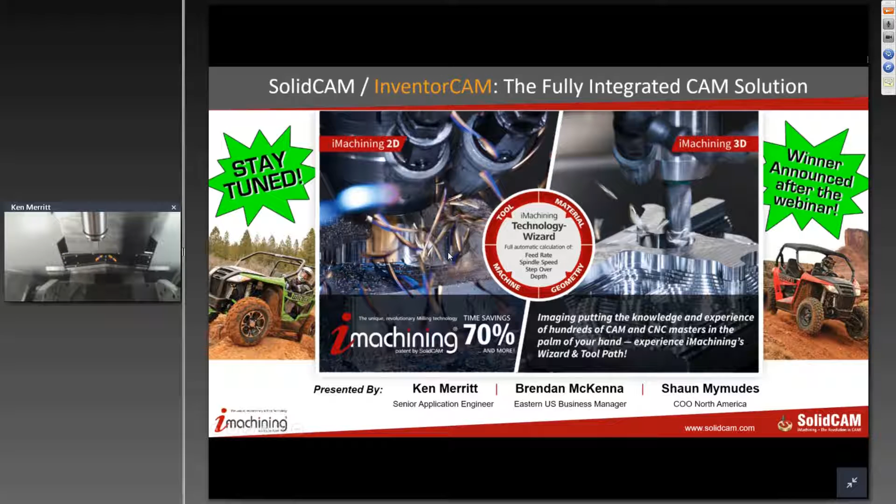We're basically going to go through today, we're going to talk about SolidCAM's philosophy, and that's leveraging what you already have to make more money, and that's the whole idea behind what SolidCAM does. We're going to go through a real brief history, and then we're going to get to the real nuts and bolts of this thing and the exciting part, where we're going to be actually doing some live cutting with iMachining.

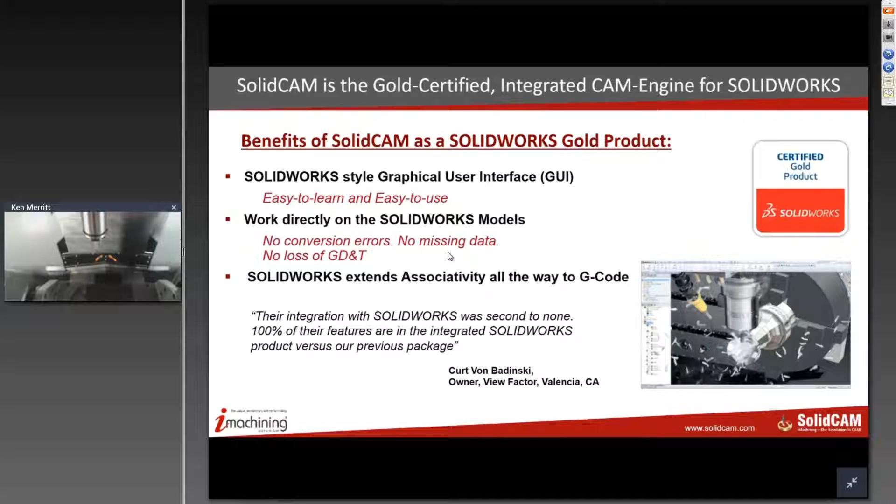So the idea here is not just with the software, but we have a technology called iMachining, which we're going to go into in real depth, and it's going to save you time on your cutting tools setting them up. It's going to save you ridiculous amounts of money on those cutting tools because you're not going to go through them nearly as often. We have customers all the time talking about that, and it really does save them a tremendous amount of money, and it's a very quick return on their investment.

And then the idea here is get more out of your existing machines. So the machines you have, you're going to have the cycle times reduced. There's going to be CNC settings that you won't have to worry about overworking your machine, because we have settings and a wizard that helps you with that. So there's an immense savings in the setup time, immense savings in the programming time, because we have a very simplified way of programming. There's a great quote from one of our customers that says he hopes not many people know about iMachining because it helps them so much.

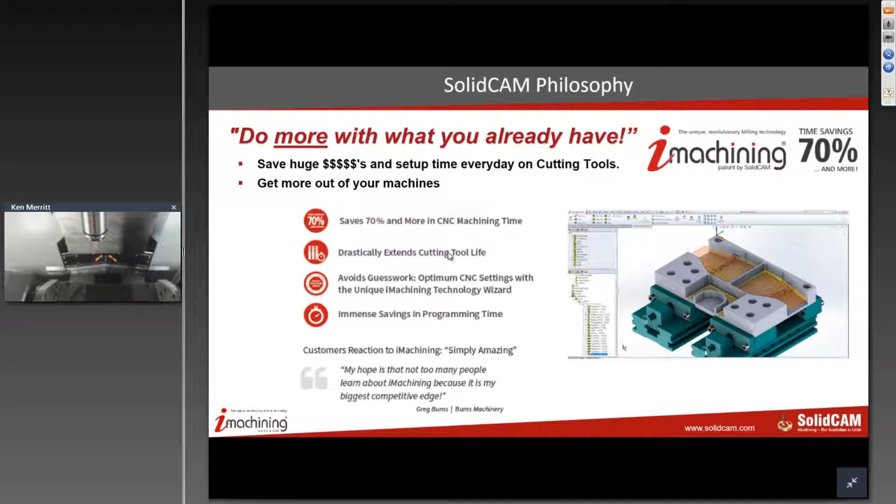Okay, so again, use your existing CNCs and the machines that you plan to purchase in the future.

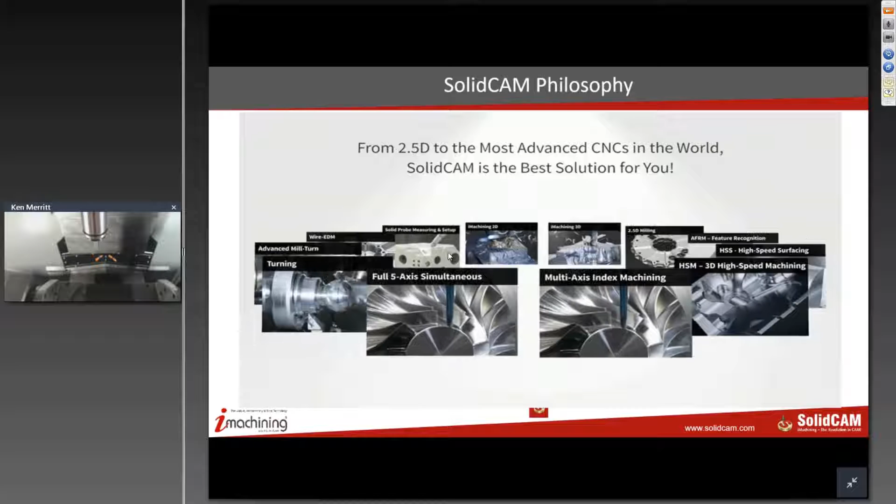One of the big things that people come to us all the time and say is, hey, I just bought a new multi-axis mill, and my current software won't program it. I can't get a post for it, etc. What do I do? So they already have a CAM system that they like, but they can't use it because they don't have a software that can handle it. Whether it's turning, mill turn, some of these real advanced machines out there, we cover that all, whether it's wire EDM, multi-axis, 5-axis, you name it. You're not going to be able to outgrow SolidCAM.

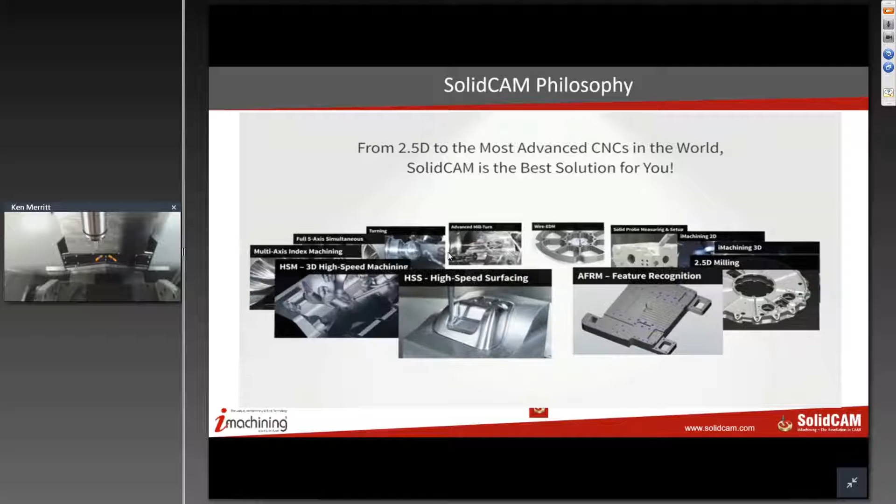Now, here's another thing. One of my customers, 034 Motorsports, was talking about how they loved to cut aluminum on their machine. That's all we ever thought we were going to be able to cut, they said. But then they wanted to do stainless because their customers wanted it. So they took their existing machine that they thought was only going to cut aluminum and started to cut stainless. It completely changed the way they do business.

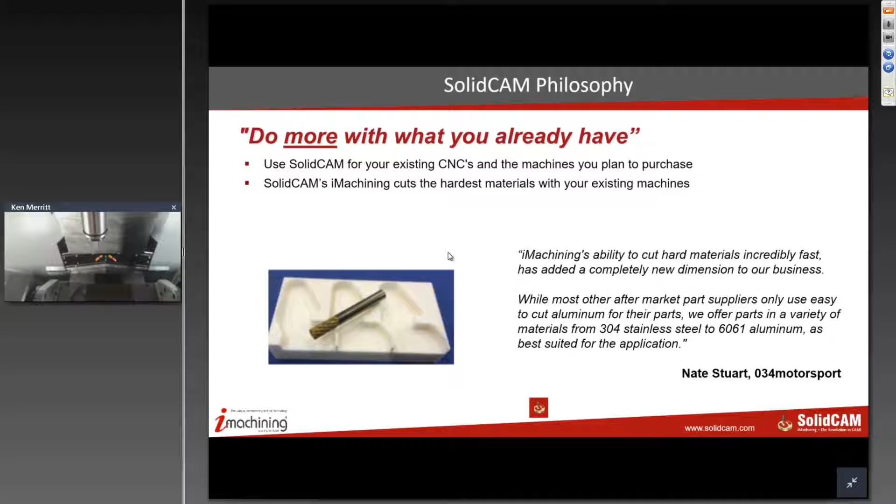Now, we also have been getting into things like ceramics. In fact, we have some ceramic companies we're working with now where they won't even talk about what's going on with the advancements we've made in that type of cutting. You'll see why later, but we have a tremendous advantage in cutting not just the hard metals, but also some of the more brittle, really hard stuff like ceramics.

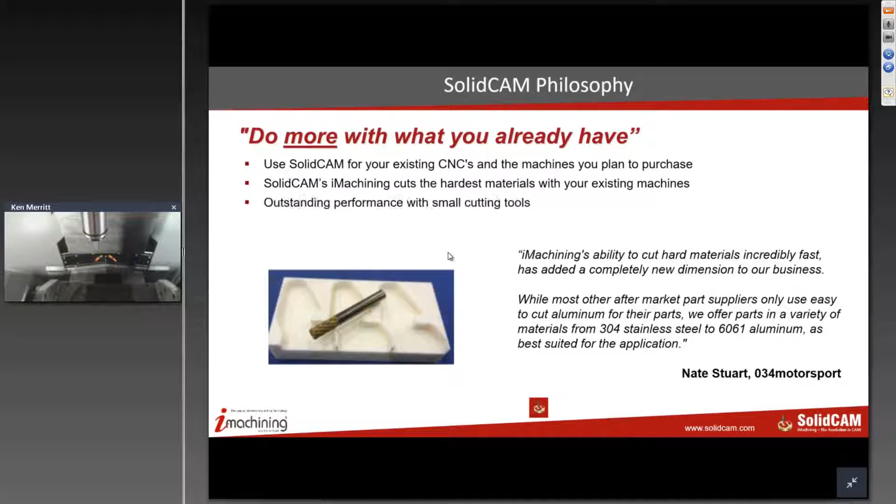So if you're in medical and you're wanting to use small tools, we can go ahead and use the smallest tools. I've got customers using tools that are almost too small to see, and because we protect the tool and how it's cutting, they can use them easily.

Ken's going to show you a little bit about the programming productivity, you're going to spend a lot less time programming with SolidCAM. So again, those are all the things that let you do more with what you already have: saving programming time, using tools you never thought you could use on materials you never thought you'd be able to cut, all on your existing CNC machine.

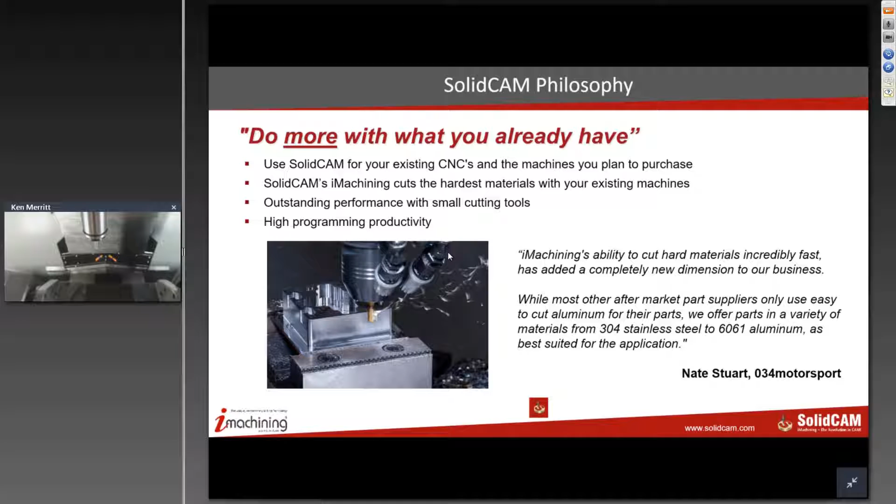Okay, so I'm going to have Brendan take it over and tell them a little bit about SolidCAM, if you would. Yeah, absolutely, Sean. The nice thing about SolidCAM is that we are still a privately held company.

That is the intention moving forward. I know as long as I'm here, I'm going to do everything I can to ensure that. So that's fantastic. Why does that make us unique? Well, one of the things it really allows us to do is to be very nimble and very forward-thinking without having to go through the red tape of working for some huge conglomerate of companies. We don't have those roadblocks.

We can channel as many resources as possible into the software, whereas a lot of other CAM companies out there now are owned by multinational corporations. So we're very forward-thinking, very quick on our feet, very customer-centric when it comes to making changes to our system and allowing for industry trends.

I like to say that we do what's best for the customers. We don't have to do what's best for the shareholders. And trust me when I tell you, there's a big difference in that philosophy.

Definitely, that's a great point. Absolutely. So again, just to continue on here with our company history, SolidCAM was founded in 1984, and it started as a standalone product, but then back in 2003, we became a fully integrated product into SolidWorks.

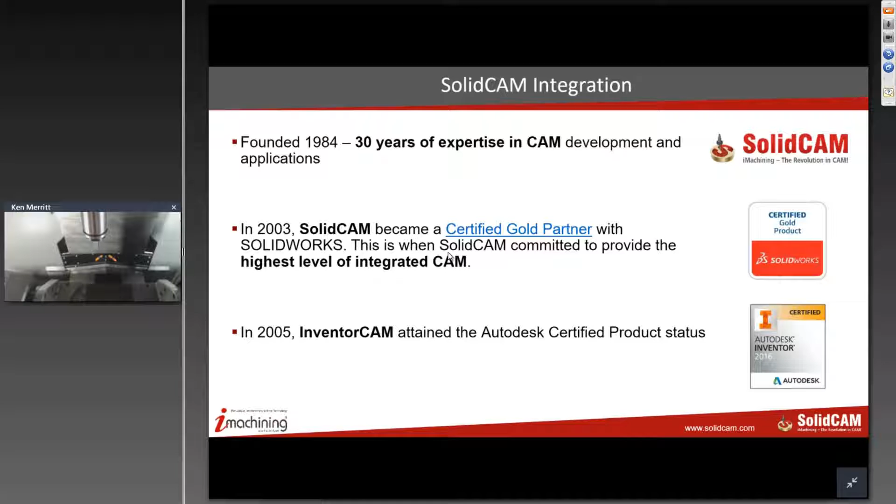In 2008, SolidCAM had a major expansion. We expanded into North America, and we've got direct support and post-processor staff located strategically throughout the country. The nice part is our staff is in basically every single time zone - people on the East Coast can take advantage of West Coast support late at night, and you can go in the opposite direction too because we have European support as well.

So we do have a direct sales team. We don't have a reseller channel, and there's a reason for that - it's actually very convenient for the customer for us to be able to provide support directly from SolidCAM. We don't have to worry about third-party resellers, and it really allows us to maintain strict control over the software and how it's being distributed.

We also offer free training webinars, we do that bi-weekly, and we have some of the best support in the business. Most of the people on our staff are either programmers or machinists or a combination of both. It's not just a guy sitting behind a desk going through a Rolodex trying to figure out the answer to your question - these are seasoned professionals. I myself am very proud to be part of this organization because our service and support is absolutely hands down the best. There's no question about it.

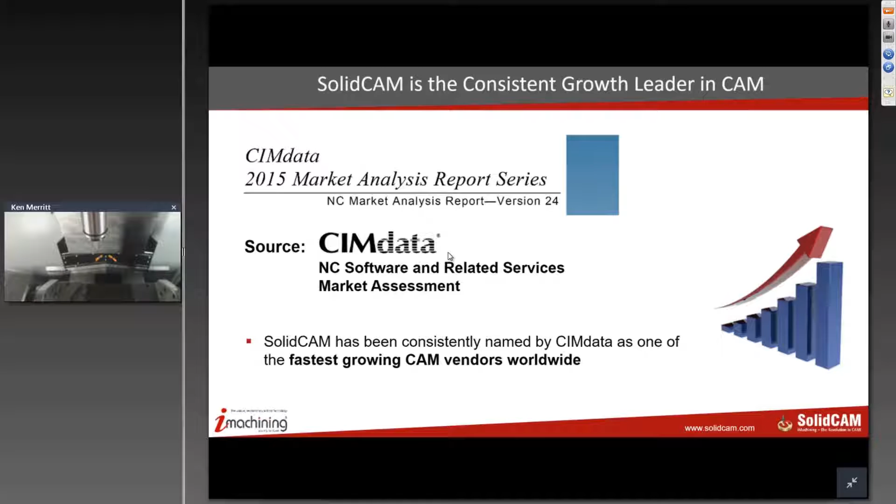Year over year, we did 40% growth over the previous year, 30% the year before that - every year it's in the 20, 30, 40% growth range. This year we're on an extremely fast-paced track, and we don't see that letting up. We got kind of a late start, so you may not have heard of SolidCAM as often as say a MasterCAM, but you'll be hearing about us shortly because our growth is just phenomenal. Well, and that's a really great point, too.

Companies like MasterCAM spend a lot of time and money on marketing budgets, whereas they probably should be concentrating more on the software. We think that aspect is pretty important. So we may not have the biggest marketing budget in the world, but we certainly have the best reputation.

For instance, when you see us at IMTS in Chicago, you won't see us in the CAM pavilion. You'll see us in the pavilion next door, because we won't go anywhere where we can't show how SolidCAM makes an impact on machine time. Pretty pictures on a screen don't cut it with us - it has to be on a machine. So if you ever see us at a show, you'll see us running on a machine, because that's what's most important.

Now I did want to explain a little bit - stay tuned, because I did not want you guys to drift off to death by PowerPoint. We know how that's going to work. We are going to be doing the live cutting now, and I also wanted to explain that we just had a recent development with the contest.

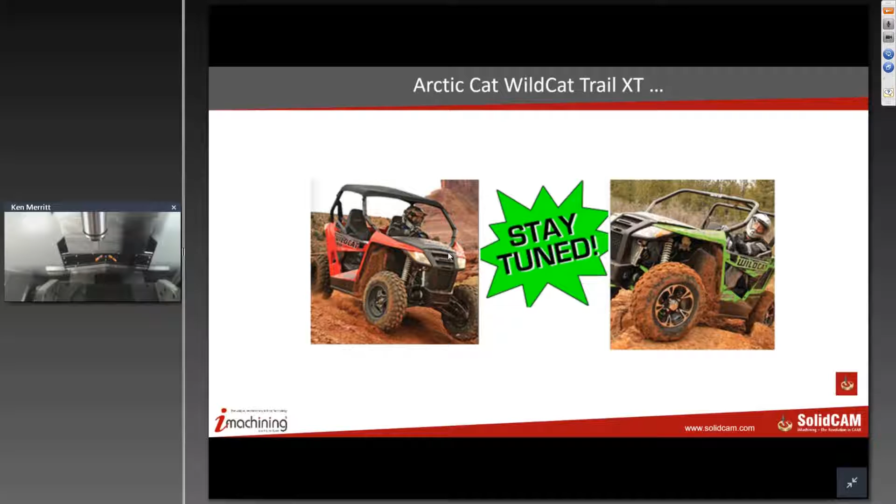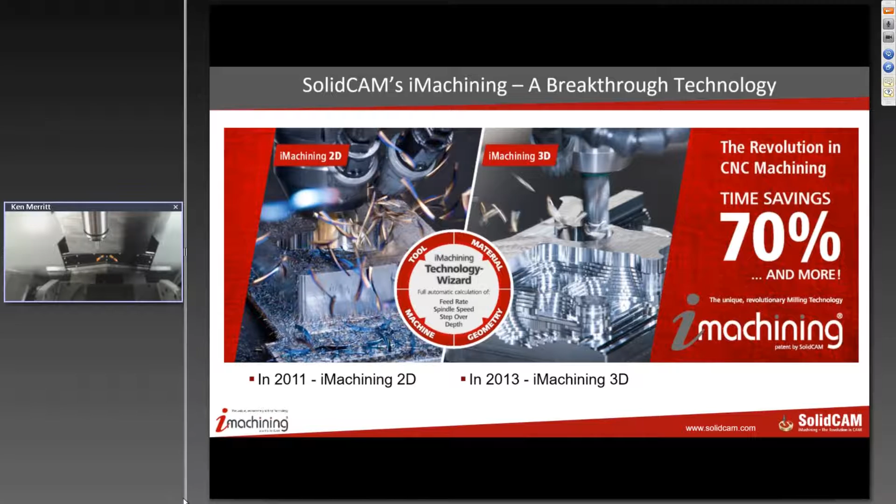All right guys, my name's Ken Merritt, and I'm hoping everybody can hear me just fine. I want to take you through what our technology is and how it works. There are two components of iMachining that really drive its fantastic relationship with our customers. One is the iMachining toolpath, second to none - it's absolutely fantastic, and we're going to spend some time going through the science today of why and how it works. The other item is the iMachining Wizard, and this makes the programming of iMachining very effective.

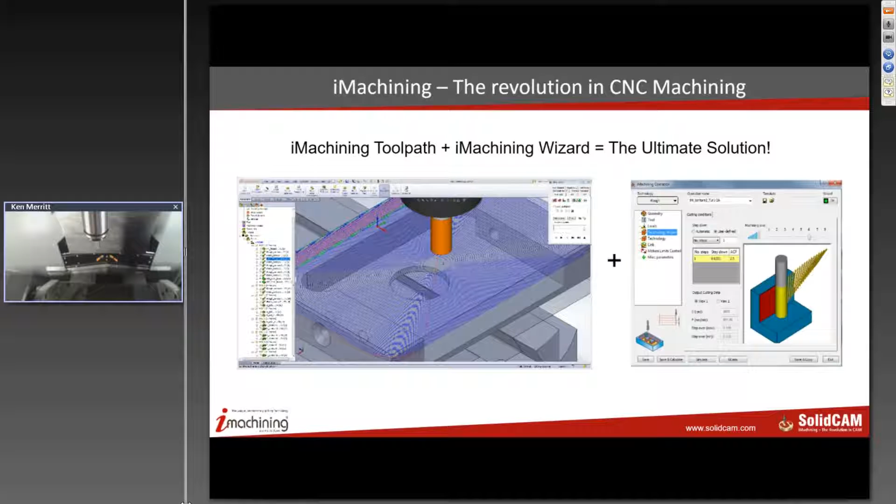Because in a real-world scenario, in order to program the appropriate feeds and speeds, you would have to take into account a whole slew of data about the material itself. You'd also have to know a bunch about your tool and what it's capable of doing. You'd have to evaluate the geometry and figure out how deep you're going to run your tool. And you would have to know not only the kinematics of your machine, but also be aware of vibrational characteristics, fixturing, and things of that nature. So as you can see, this could be a very complex set of parameters you'd have to figure out in order to effectively drive the iMachining toolpath at its optimum level.

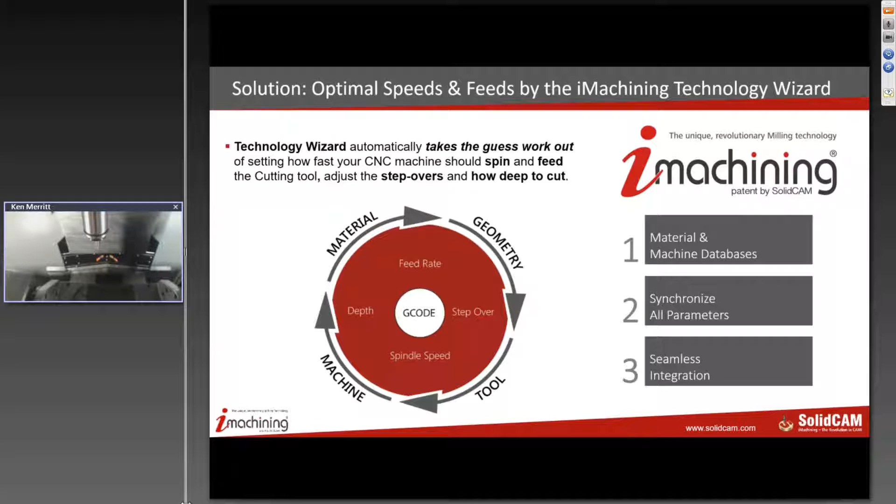Now with the iMachining Technology Wizard, it takes all that guesswork out. It takes the information from the machine - it knows the kinematics, the maximum feed rates and spindle speeds and things of that nature. It takes the material hardness and machinability characteristics. It takes the tooling information, and blends all of those into a symphony of parameters that are very coordinated to drive the tool the way you're going to see it run here in just a few moments. One of the things we like to talk about is

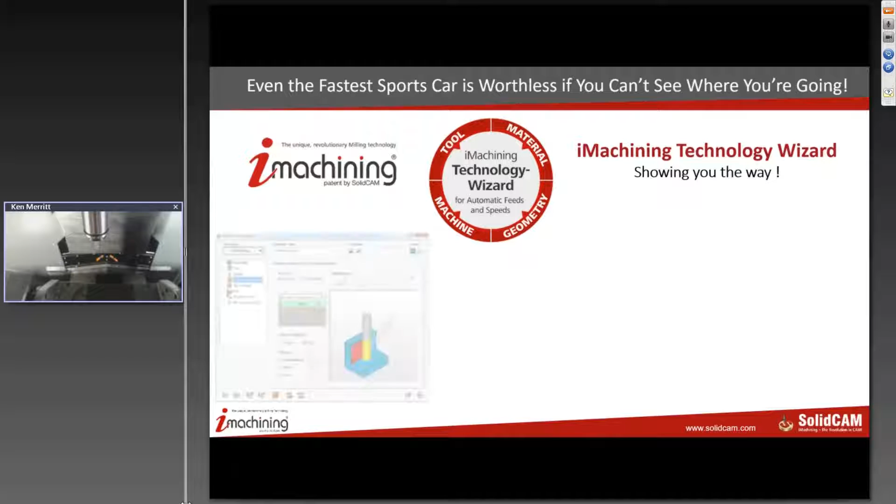finding your way through all of this stuff. If you had the fastest sports car in the world, but no lights, you're not going to drive it at night, right? If you can't see where you're taking it, it doesn't matter how fast it is - it's not going to get you there. So one of the things we want to take you through is this iMachining Wizard that we talk about.

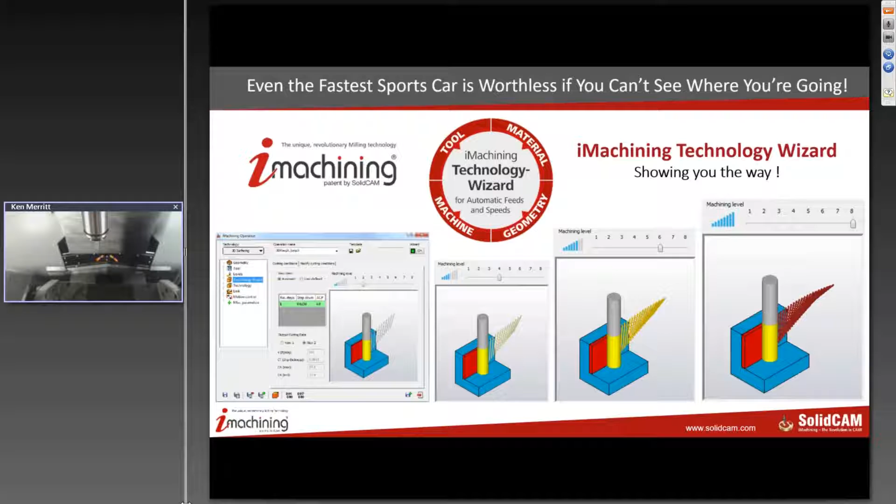As you can see here, the idea is because we have pre-knowledge of the machine variables, the material variables, and the tool characteristics, we can set this slider from a very conservative tool path to a very aggressive tool path, and the system automatically balances those parameters for us so we can quickly take advantage of that knowledge instead of fumbling around trying to find our way through that. So we're going to get into the cut right now.

What we're going to do—the safety glass goggle you see here, over on the left upper corner is a little mold core we developed for this. There's a couple of things I want you to pay attention to as we're cutting, and I'll point those out as we go through this.

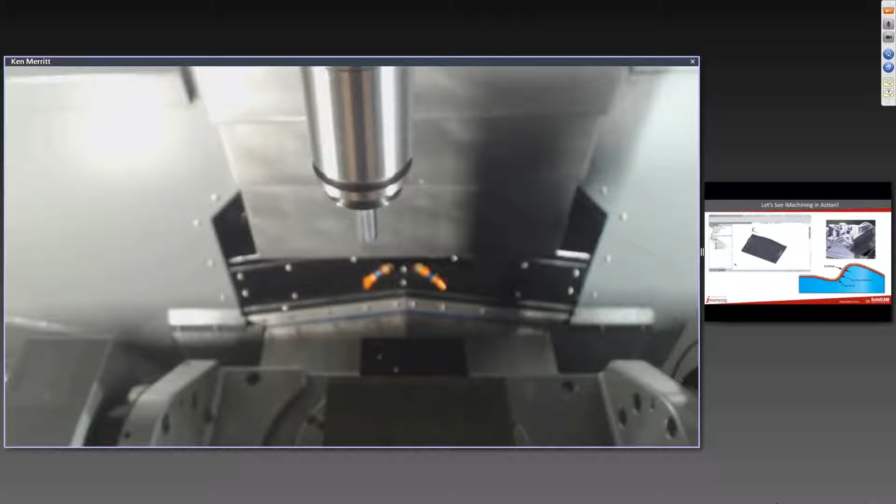Okay, now we are in 1018 cold roll steel. That's a 6x4 block you should be seeing in there. It's a little below the screen view, but that is also a GW Schultz HGW 3/8 inch tool you're seeing in there, and I believe we are ready to go. We're going to rock and roll. Here we go with the cut.

Now we're going to be cutting very fast here, as you can see. We are at 750 thousandths total depth of cut, and we're building a 3D mold core here. What you're going to see take place as this tool is cutting is very controlled cutting angle management. You can also see clearly in the picture that the chip ejection is extremely dynamic, and that's because we're always staying on the chip thinning side of the cut. I'll take you through some of that physics in a few minutes and show you how we do that. But we are currently cutting at 13,750 RPM on a 3/8 inch tool, at anywhere between 180 and 250 inches a minute, and we're doing that at a cutting angle of 45 degrees, okay?

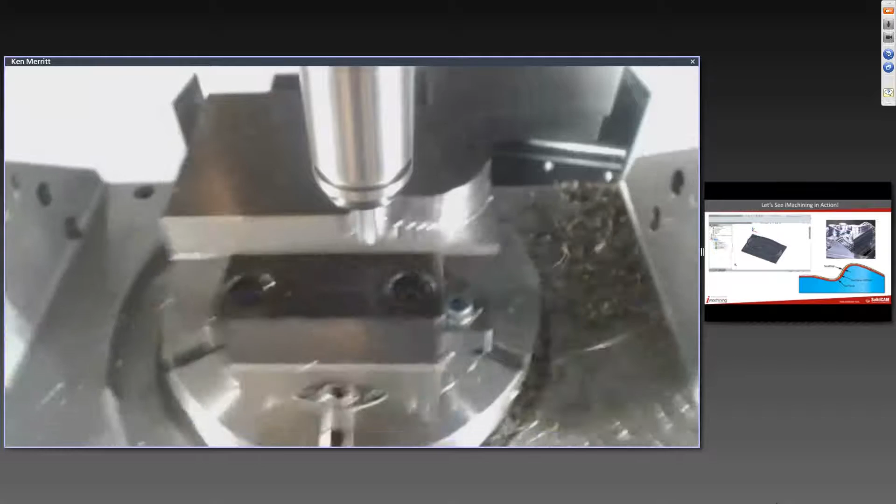Now the other thing you're going to notice here is that the repositioning moves are very optimized. What we do is during the calculation time of the algorithm, for each movement of the tool, we're automatically updating the remaining stock so that for each reposition move, we know where the material has been cut out, and we're able to move around that with what we call detour moves, without forcing the system to go back up to the rapid clearance plane. This gives us a way of very effectively repositioning the tool in a very optimized manner.

The other thing you'll notice as we go further into this cut is we've done an extensive job of regionalizing the cut. Now we're going to go into the cavity portion—we cut the hole right into the model, and we're going to helix right down to 750 thousandths depth of cut. We're already at 600 thousandths right now, and we're going to take off cutting this with what we call a spiral morph. Now, the idea behind a spiral morph is that it keeps that tool in contact and allows us to get a much better advantage in the cut without having to reposition. But a spiral morph can only go so far within the range of the minimum and maximum cut.

You'll notice it switched into our D-slot recoil, and now it's going back into that spiral morph. See how effective that spiral morph is? When that's done correctly, you can move a lot of material really quickly, okay? Now it'll go through this again—it'll do the spiral morph as far as it can, and then when it needs to, it'll switch back into what we call our D-slot recoil, which is what you're seeing right here. This allows us to very effectively reposition that tool, get right back into that next cut, but without ever over-engaging the tool, okay?

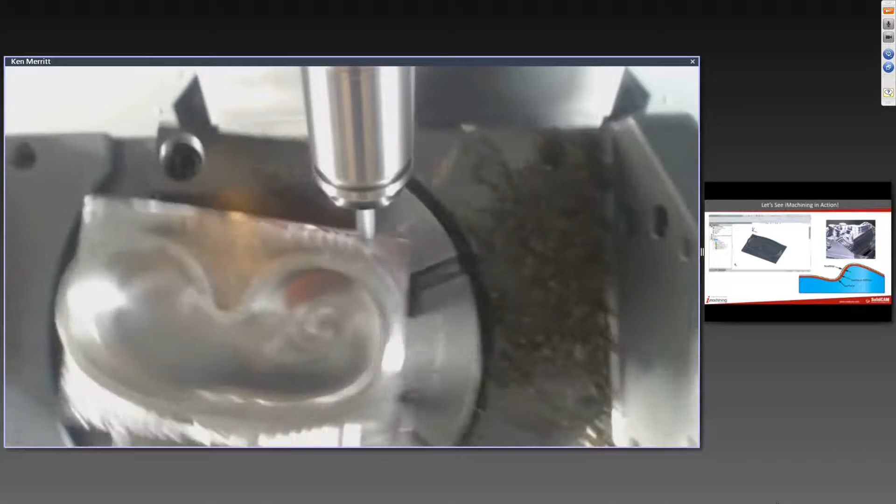A lot of people don't think about how a 5-axis machine can be used. We're not cutting a blade here, we're not cutting an impeller. However, we can still take great advantage of a 5-axis machine because now we can tilt this over on the side of the ball, and we can use a much higher surface velocity area of the tool to do our finishing. As you're going to see as this goes along, this is going to result in a very nice surface finish for us while we're moving very fast across here.

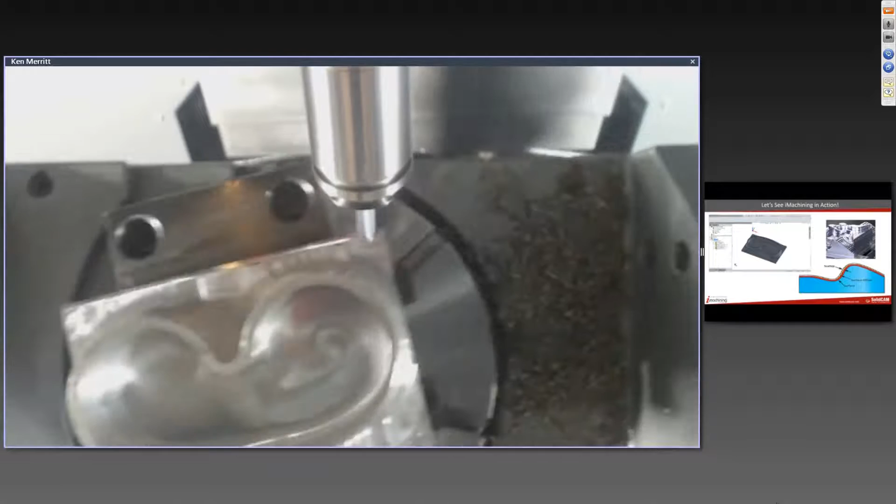I'm at 16,000 RPM and about 180 inches a minute doing finishing.

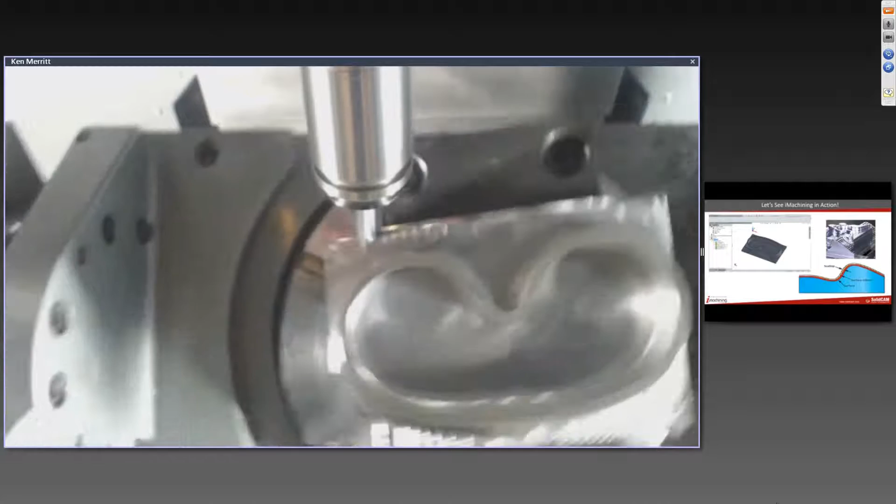And you can already start to see that shine appearing back there. We're getting a very nice surface finish on this because we're tilted over at 40 degrees, and we're doing a lead angle of 10 degrees so that we never put the tip of the ball where it has no surface velocity onto that cut. So something to think about.

We not only do a fantastic job in straight 3-axis, but there's also some really powerful things you can do going into 5-axis, even if you're not dealing with engine porting or turbine blades or things of that nature. Okay, so now let me reach in here and turn this air down just slightly.

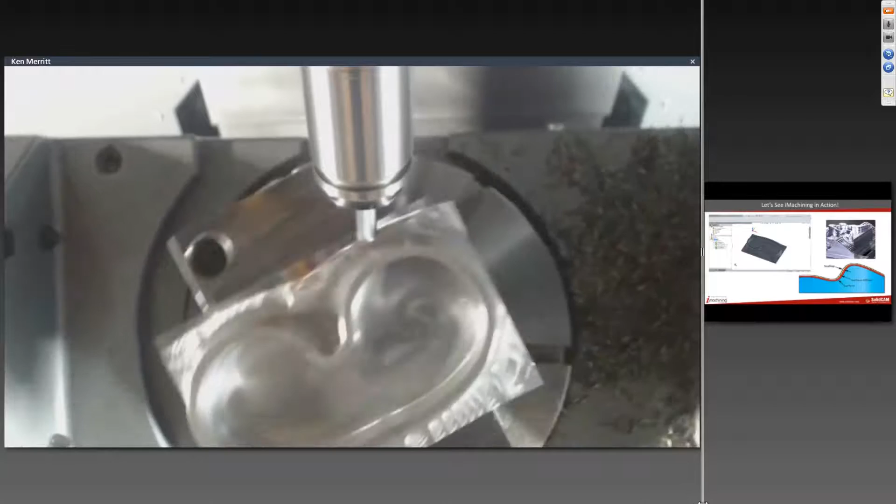Ken, I was just going to add, for something like this, of course you could cut it with a 3-axis machine, but once you take this part off and see the surface finish you're getting, it's also going to drastically reduce the amount of handwork you'd have to do to polish that surface.

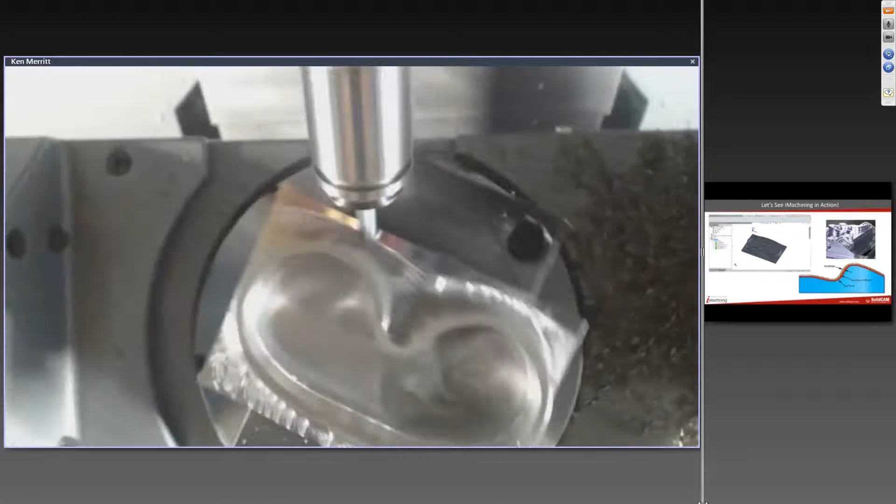Absolutely, there are so many benefits to it. It's amazing. So, trying to get people to think outside the box here: just because you're not doing complex aerospace blades or vanes doesn't mean you can't benefit from 5-axis. And SolidCAM has an absolutely fantastic simultaneous 5-axis module that will do everything you need it to do.

All right, so at this point... hold on, Ken, let me just add this. We're on a 5-axis, and it's a nice machine, and we'll talk a little bit about that later.

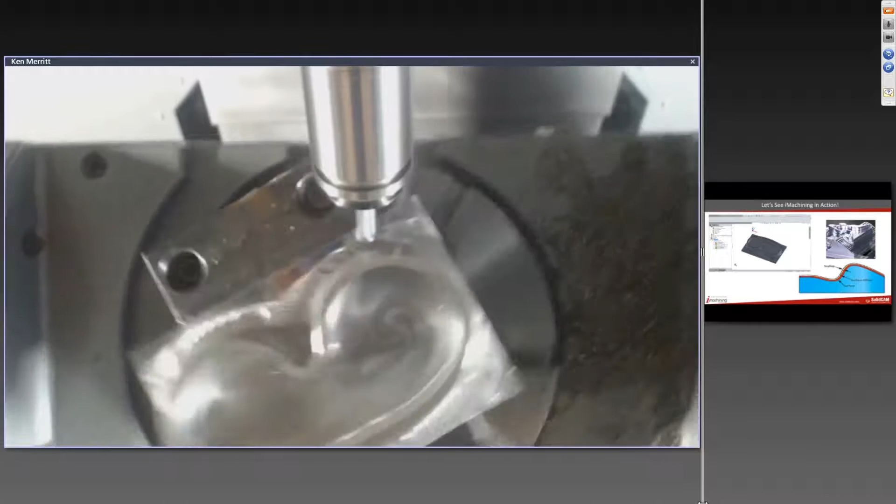But again, I'll bring up IMTS. We had an old Defiance mill that was meant for cutting wood and foam, and we were just running the snot out of it, and people were shocked and amazed. So we love to call that our Angry Beaver. We were originally supposed to do our stuff today on a sharp mill, a very low-end mill, but the setup didn't work out. Suffice to say, whatever machine you have, it's going to absolutely boost it beyond belief.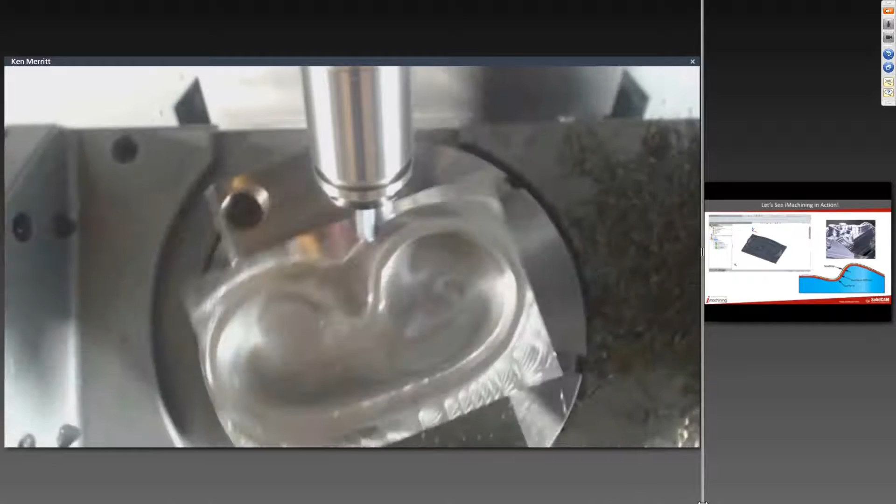Yeah, Sean, that's a great point. We're going to get into more of that philosophy as we move forward, because I'm sure a lot of people might be looking at this saying, well, do I have to have a super high-end machine to make this happen? And the answer to that is no. We're going to make you more productive with what you already have. We'll show some video of that in a little bit here.

Well, at this point, let's do this. Go ahead and change your screen again. Slide the bar over, leave this open enough that you can watch this. It's kind of cool to watch all this 5-axis stuff going on, and you'll see as it progresses the growing beauty of that surface finish. But let's go ahead and expand the PowerPoint back out.

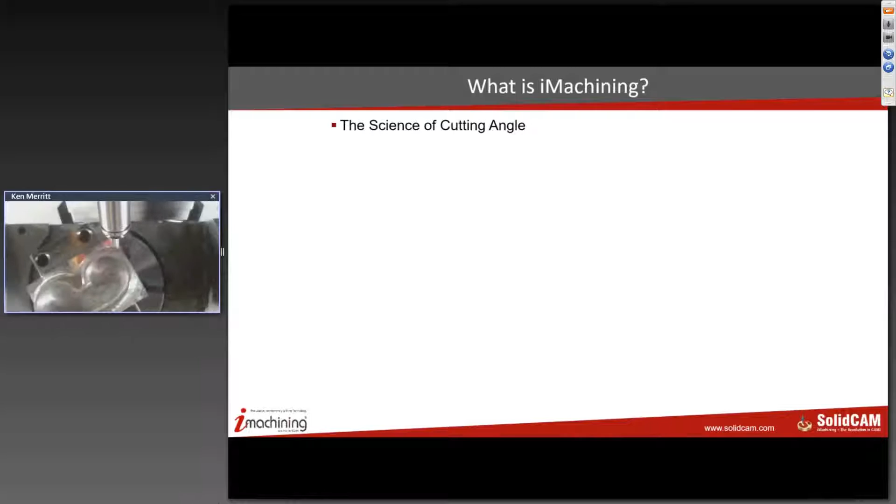I want to get into the science of cutting angle and explain a little bit of the physics behind all this, so you understand there's way more to this than the average person thinks about. What we are doing is managing how the tool is engaged to the material, in a very specific way that helps us control a lot of the forces applied to the tool and consequently to the machine.

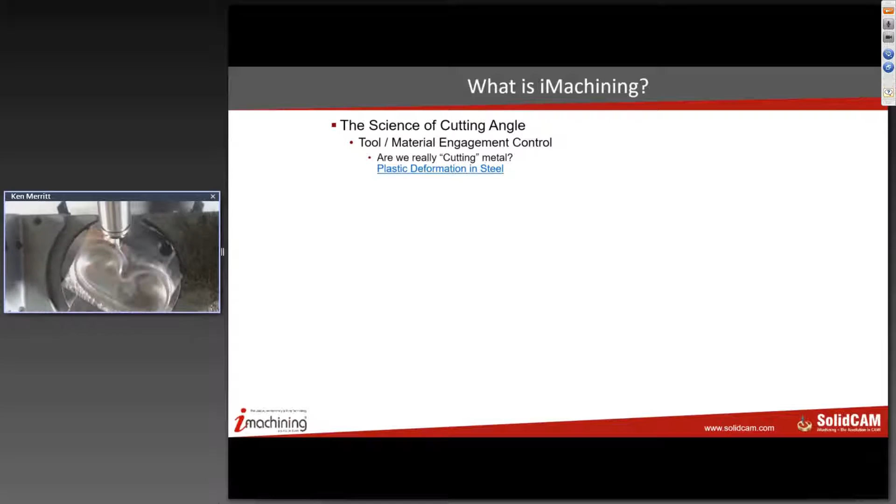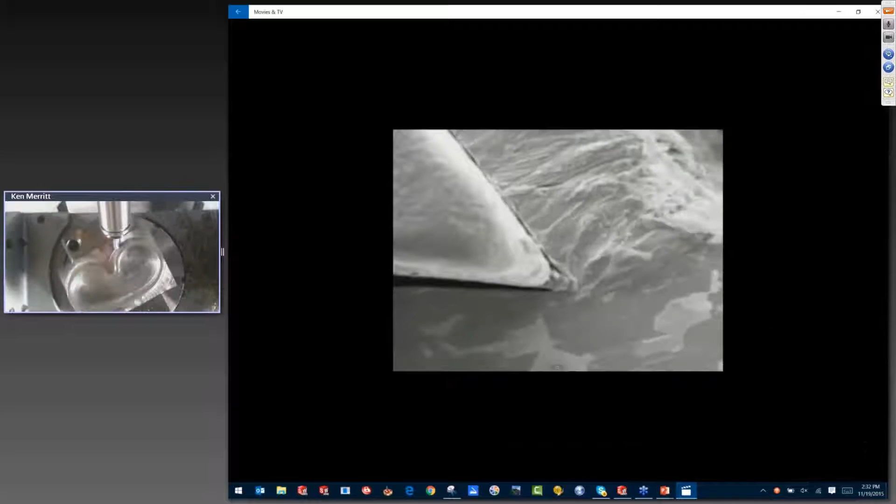Now, one of the things I want you to be aware of: we're not really cutting steel, okay? It's kind of a misnomer when we say we're going to cut that part. What we're actually doing is called plastic deformation, and this video gives a real clear image of what plastic deformation is. This is a lathe insert passing through 1018 cold roll steel, similar to what we're cutting today. Notice this is a finishing tool, a 35-degree tool, and you can see under here what I want you to watch.

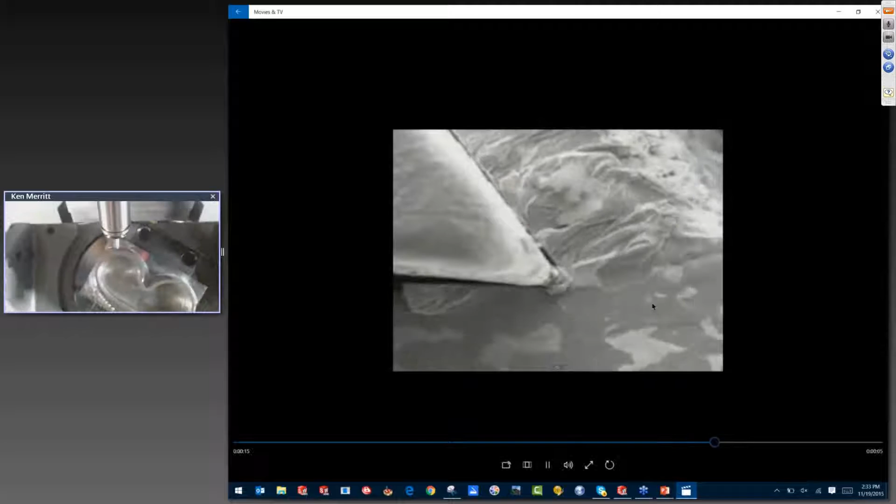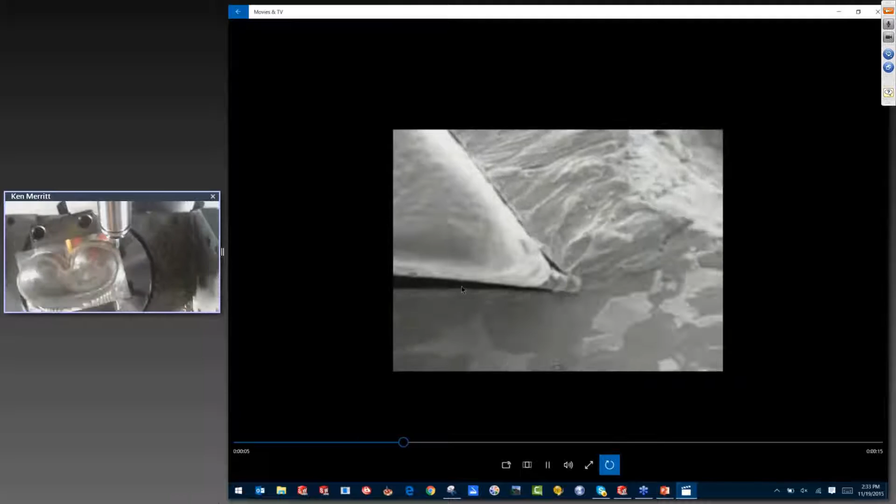Let me put this into rewind so it'll do it. You can see the material sort of bend under here due to the pressure. That's what's known as elastic deformation — the ability of a material to be deformed from its natural state, but once the pressure is removed, it returns to its natural state without deviation.

What's going on up here is obviously not elastic deformation. This is plastic deformation, okay? It's basically a chiseling action against that material. So I want you to keep that in mind as we begin to discuss the physics of what's happening during that cut.

Are we going to be testing later for that, just to make sure people are paying attention? We might. Could we make that a criteria of whether or not they win the contest? No, I don't know, probably not.

Well, let me get you into this a little bit, because I think this is pretty cool stuff. One of the things we've noticed in practical examination over the years as we've been studying this is that as we increase the cutting edge velocity, the actual latent energy of plastic deformation goes down. This makes it much easier to remove the chip, which means we can take a thicker chip. So we have the rotational velocity of the cutting edge, and we also have the forward velocity of the tool. When those two are in balance, the pressure vector on that tool is about like you see it here.

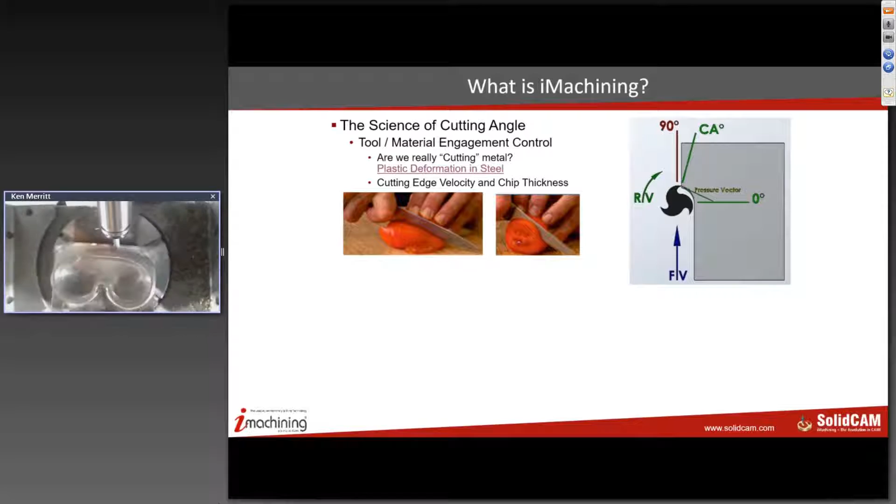Now I want you to think about a knife on a tomato. If you take a sharp knife and just push it straight down on a tomato, it'll cut it, but it's going to squish it too, right? But if you take that same sharp knife and drag it very fast across the tomato, the knife will virtually fall through the tomato without any effort whatsoever. That's physics—a little different, but the illustration is very much the same as what we're talking about today.

As you increase the cutting edge velocity on the flute, you decrease the amount of energy necessary to remove the chip. Now, what that allows you to do is increase the chip thickness, which means you can carry more heat off in the chip, which means you can increase the velocity of the cutter. It's going to generate a little bit more heat, but you can then increase the size of the chip, so it takes more of that heat with it. So it's kind of a ripple effect—it rolls up on itself. And of course, there's a limit on that.

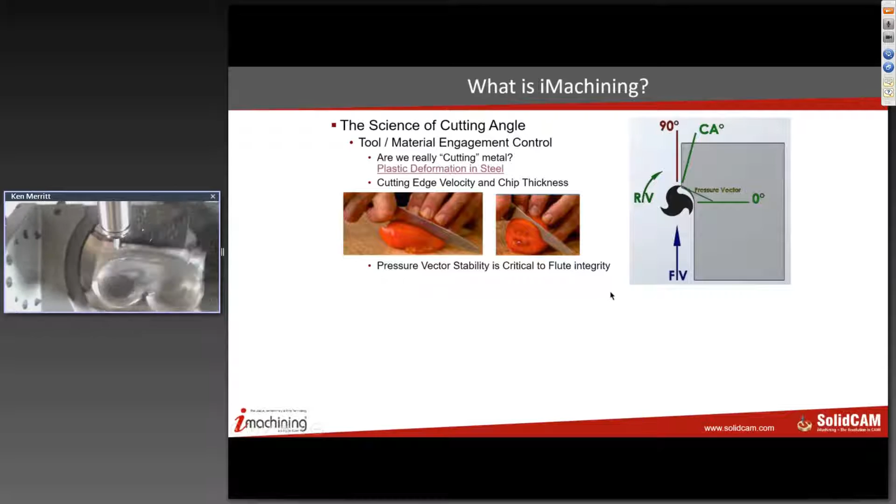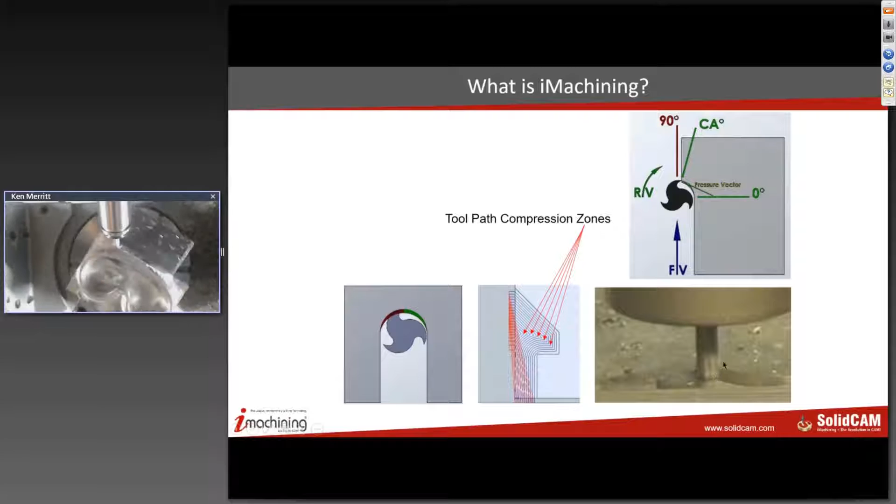But let's take a look at a traditional style of a cut. This is a traditional pocket shape. Each one of these sharp corners here, I like to call a compression zone. This is where, when the tool makes this transition, the tool becomes completely enveloped in the cut—we get into this type of mode where we're in a full slot cutting condition.

Now, on the left-hand side of that cut, this chip is getting thicker and thicker as the flute advances towards the 90-degree quadrant. On the right-hand side, the chip is getting thinner and thinner. The other thing that happens over here is, as that chip is curling off, it's actually going right into the direction the tool is traveling, and so you wind up getting what's called chip compaction. Now we have conduction that's conducting the heat in that chip back into the tool and overheating it.

That's why for years the tooling manufacturers traditionally only recommend 300, maybe 400 surface feet when cutting steel. Well guys, today we were at 1,400 surface feet in that roughing operation. Pretty dynamic, okay? And we can do that because we're getting a very dynamic ejection over here on the right side. The chip is being ejected opposite the direction of the tool, therefore carrying all the heat out with it.

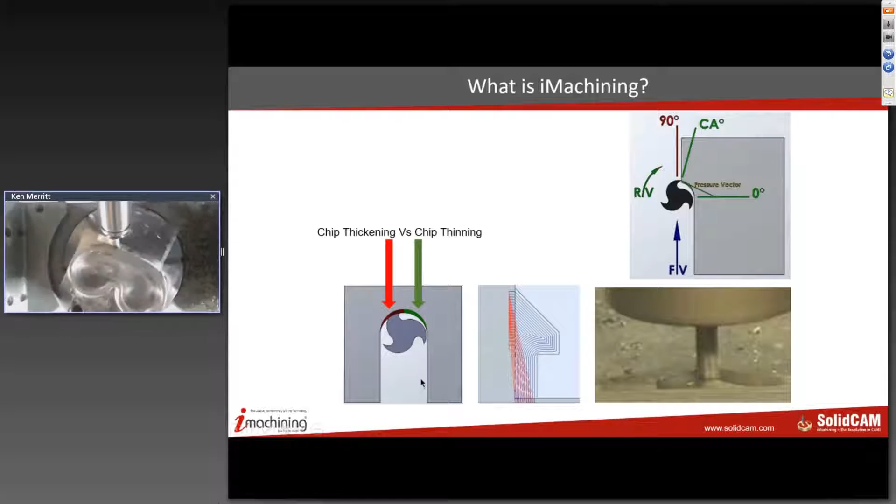Now, the other thing that happens is as the tool is cutting here, the pressure vector, when it starts out, is pushing virtually directly opposite the direction of the tool, and it creates a linear or deflective force on the tool—which is one of the reasons we've never been able to go deep, because we wind up breaking the tool off from putting so much linear force on it. Also, once we reach the thickest part of the chip here at the quadrant, the pressure vector is pushing virtually perpendicular to the direction the tool is traveling.

That creates that flex. We've always had to come back and take a flex cut because of that. So we wanted to get rid of all of that, but there's also something else that happens here that is very, very powerful.

For an instant in time, when that flute crosses the 90-degree quadrant, the effective rotational velocity of the cutter, as it relates to the forward velocity, becomes zero, but we still have forward velocity on the tool, so that pressure vector gets flipped to the outside, and now we're pushing inward on that flute and causing it to break.

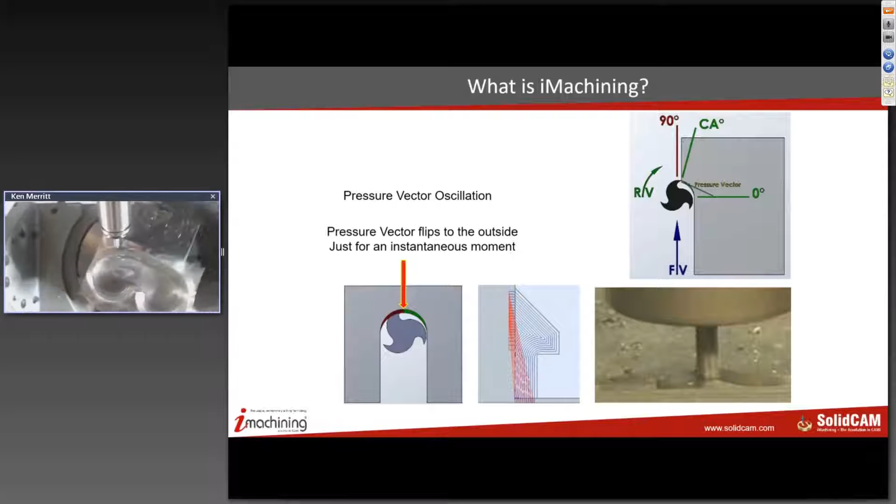It also creates what you guys have all seen, harmonic vibration. What you noticed, if you could hear it today, that tool never sounded like it was chattering because it's never seeing this flip.

That's because our algorithm limits it to 80 degrees of cutting angle and 10 degrees minimum. We've noticed over our tests that somewhere between 85 and 90 degrees, we begin to see that increase in harmonic vibration relative to approaching that quadrant, approaching that vector flip.

So we kept it below 80 so we don't run into that. The below 10, we don't ever want to see a cutting angle below 10 because then we get into a situation, that video I showed you at the beginning, where we're using the plastic deformation.

We have to have a chiseling action in order to remove that chip. If we just bounce off the surface, then all we're doing is burnishing and dulling that cutting edge, and that's not a good thing either. Not to mention that at 10 degrees it's not a very efficient cut.

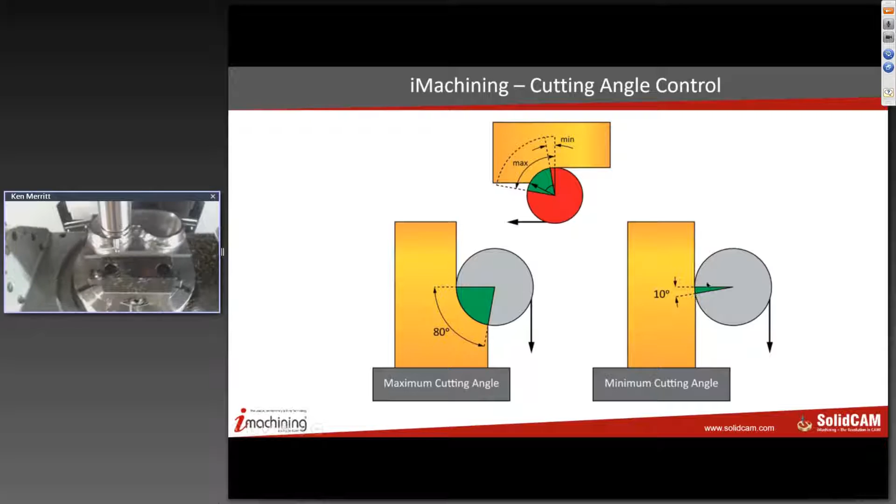So we control all that with our algorithm. That's one of the things it does very, very powerfully.

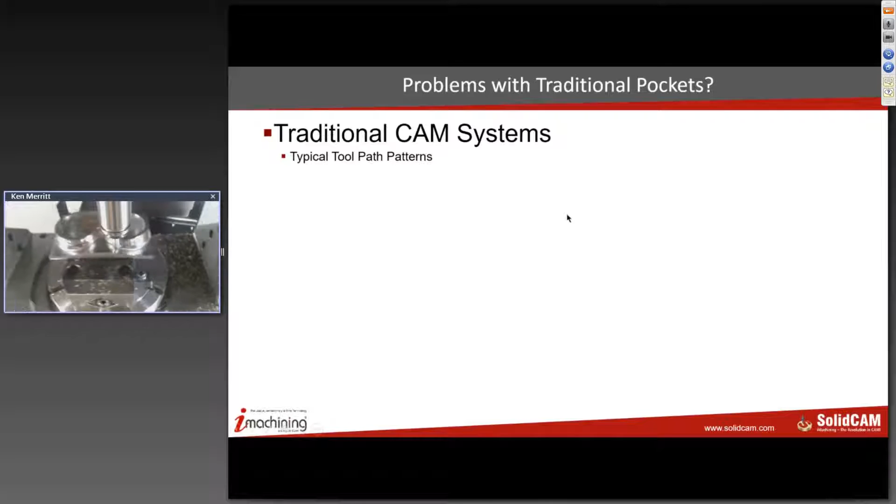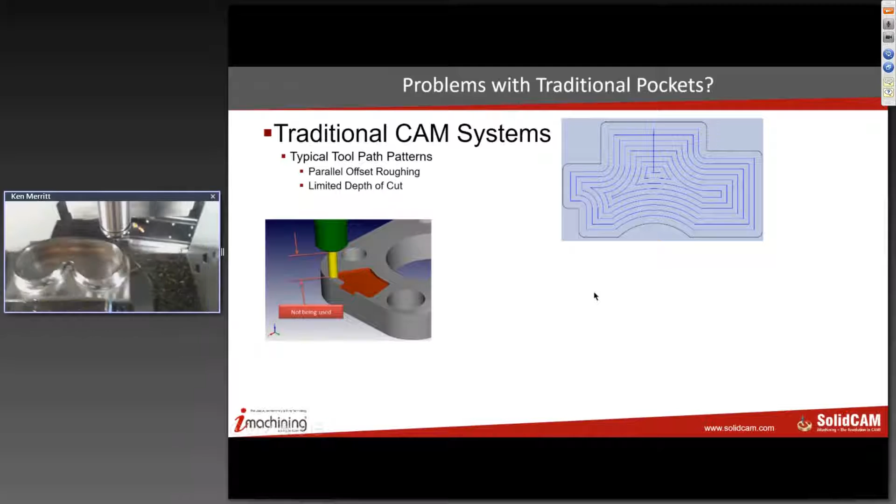Now I want to talk about a traditional toolpath and some of the problems we have with it. Because it's a parallel offset roughing path, notice all these sharp corners. Everywhere the tool changes direction, we get into those compression zones, and because of the increased linear pressures, increased forces on the tool, compaction, and increased heat, we can only go so deep, which means most of the flute of our tool we're not getting to use.

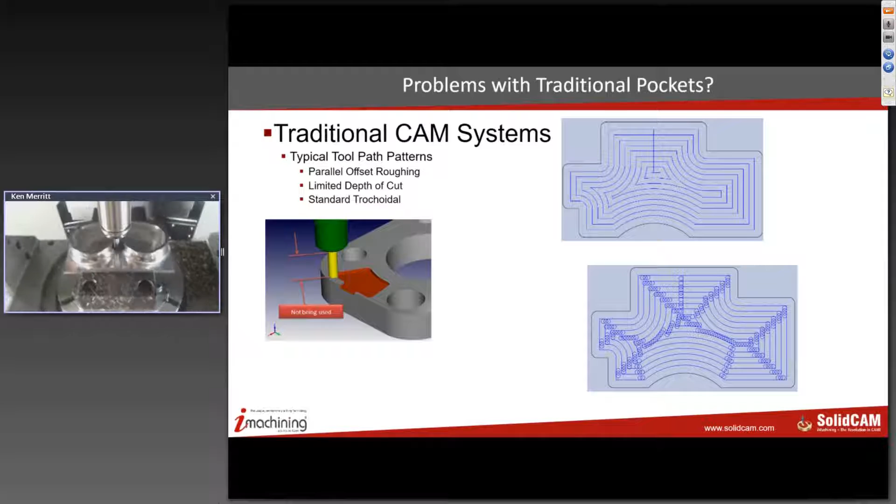We'll show you a video here in a little bit that demonstrates that as well. Also, over the years, one of the things we did, almost every software on the planet did this, was create a function called trochoidal milling, which creates these little loops into those compression zones in an attempt to reduce some of those negative pressures on the tool. That worked a little bit. It wasn't really the right thing to do, but we didn't know any better years ago.

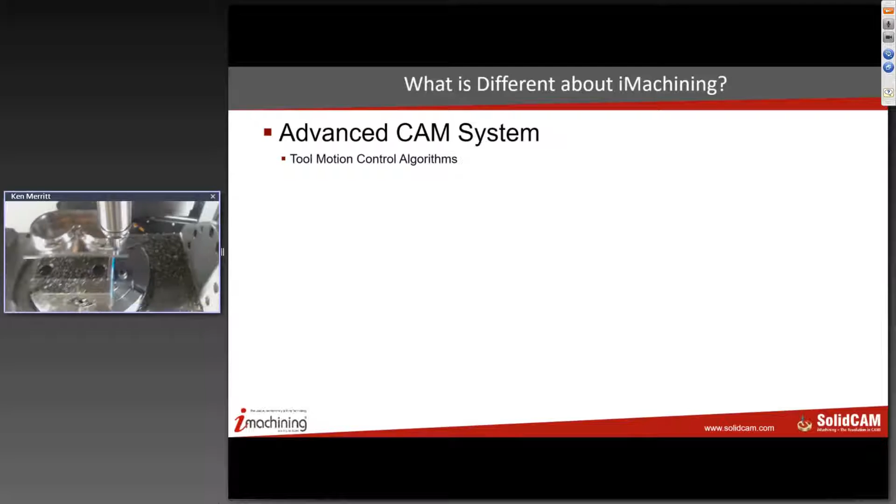Then we came up with iMachining. Now iMachining is a very advanced system, and it uses a completely different algorithm to control how that tool is going to function. This is our D-slot trochoidal, what I was talking about when we were seeing it on the screen. Let me walk you through.

This is the center line of the tool. Notice that it flows down through here. At this point, it actually helixes off the surface, does a high feed rate G1 repositioning move up to here, and then helixes back in for the next cut. Does the same thing, same thing, same thing.

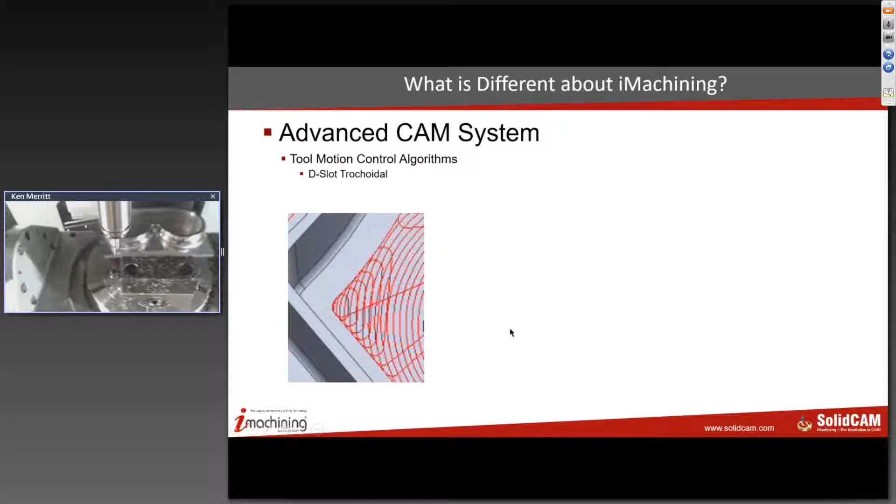So notice the difference here is there are no sharp corners in this tool path. There's nowhere to over-engage the tool. The cutting angle is completely managed all the time.

Now, we do that also with the morphing spiral that I talked about. The best thing about the morphing spiral is the tool is always in contact. Think about it. If the tool is repositioning, it's in the air, you're not making money. If the tool's in contact, chips are coming off, you're making money. So we want to optimize that as much as possible.

Now, the spiral morph can be a two-edged sword, and I'll explain that in a moment. But one of the things we do is use these separation channels, like you see here, to split an area out to where we can spiral morph it. Now the tool can move around it.

In this case, from the outside to the inside, means we don't ever run into an internal corner again. It makes it much easier to manage that cutting angle in a way that is very effective for the tool path. Now that's quite a difference from the traditional view, isn't it?

Well, you know, that's the other thing, Ken. When you look at that picture on the far right, a lot of people might say, well geez, that looks like a lot of toolpath compared to the picture in the middle. Can you expand on that a little bit?

Oh, you bet. It is a lot more toolpath if you're only talking about one level. But let's take a look at this toolpath as being a 1-inch deep toolpath. If I do this with a really deep toolpath, I have to take this same pattern multiple times at very shallow depths in order to avoid breaking my tool. I also have to do that at a much slower spindle speed and feed rate, so it takes a lot longer to run that pattern, and then I have to do it again and again at each of those Z-steps.

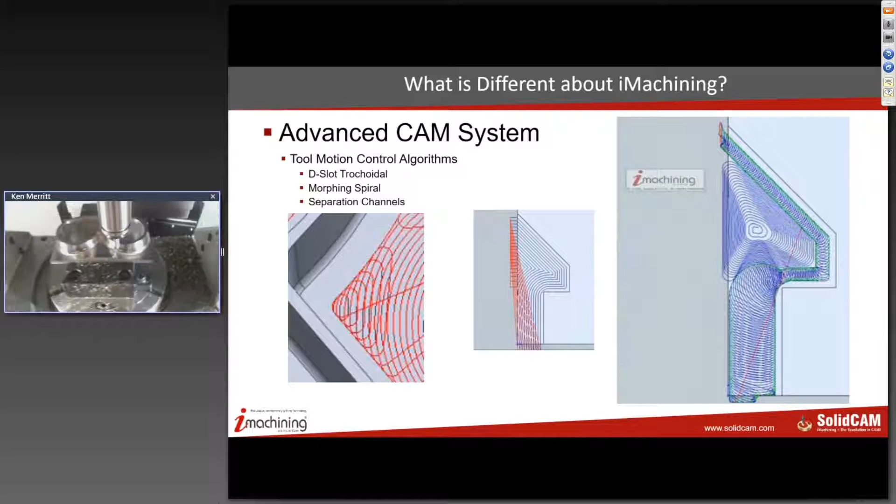It is absolutely easy to program because you basically select the geometry. Our algorithm figures out where the tool motion needs to be. You don't have to think about that. That's the beauty of the wizard - it takes into account all of these different parameters we talked about at the beginning, and uses those to establish how it needs to run all this at the depth we've chosen, so as to not overload the machine, not overload the horsepower of the spindle, not overload the vibration characteristics of the spindle, and so forth. So it's a very easy programming scenario, and I can show you that in just a few minutes.

Now, I talked about the morphing spiral being a two-edged sword. I want you to understand this. If we took a long, narrow section like this and we simply peeled off that back separation channel so we could morph all the way around to a centralized collapse point, that would become a very inefficient toolpath. Along these long sides, we would have to be at the very minimum angle in order to meet the control point in the center, and across these short sides, we'd be at the maximum, getting a very efficient cut. But most of the cutting in that case would be done at or very near the minimum cutting angle and be very inefficient.

So what we did is we created another function in our algorithm that automatically analyzes this - and again, this is not something you have to figure out, you don't have to do containment boundaries or anything like that. The system looks at the topology of the area and automatically calculates where to break up the zone to create more symmetric regions where we can do the spiral morph at or very near the maximum cutting angle, where we get maximum efficiency in the cycle. So it's a very, very powerful feature in the system.

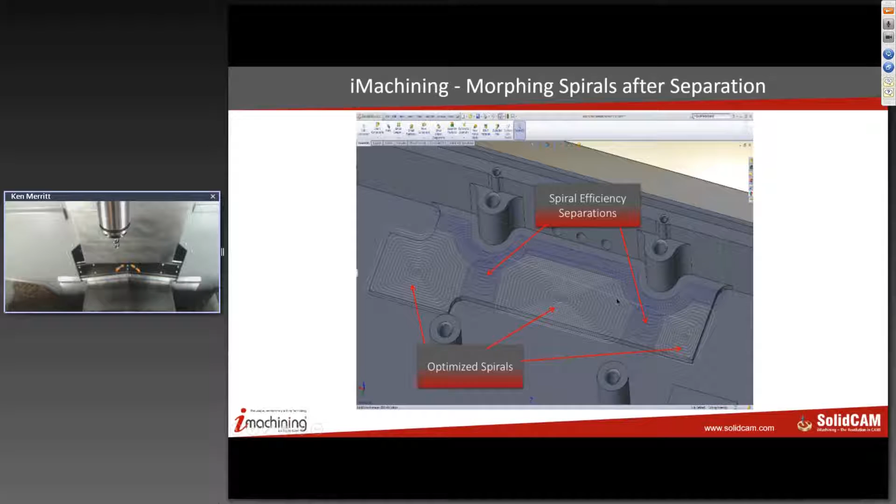Now, we also put a priority on the morphing. If we can morph, we will. So in this case, we're showing an inside-out, but we start off with morphing. We're going to deal with what we got to deal with - if there's islands, if there's regions that need to be D-slot trochoidal or channel separated, we're going to do that.

But if we can, we're going to switch back into the morphing spiral because, again, when done correctly, it is the most effective way to remove material. We'll deal with what we got to deal with, but if we can, even if it's just for a short period of time, we're going to switch back into morphing so that we optimize every second we can out of your toolpath for you.

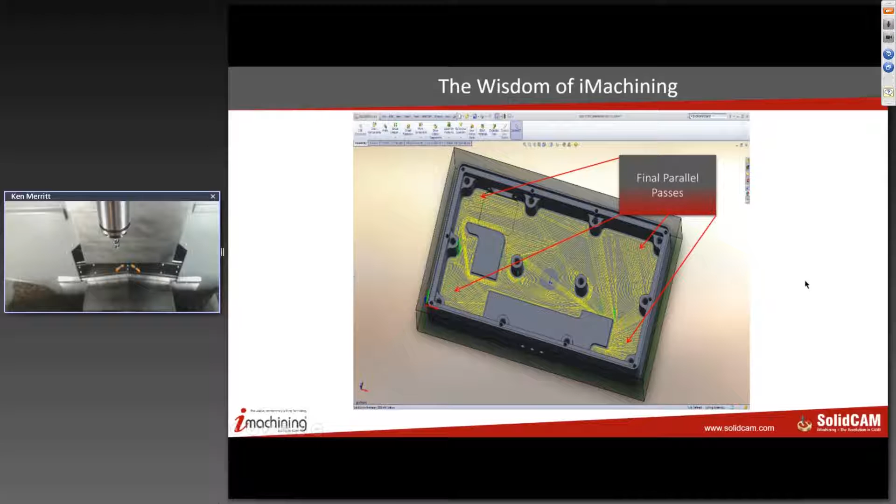Now, at some point in the course of most of our toolpaths, we have to switch back into final parallel passes, the D-slot trochoidal. However, one of the things that makes us a very strong system is because we can use that minimum to maximum angle, we can morph these passes as well. So these passes can stay in contact more for a longer distance and do less repositioning, again increasing the efficiency of that toolpath. We also use those detour moves to try to keep the machine in cut as much as we can and quickly get back into the next cut, optimizing the region as well as the retracts.

Now, we also support rest material. Obviously you could use a bigger tool out here, and the rest machine operation is going to come in and do all of our iMachining stuff only in those areas where the bigger tool didn't fit.

We also do a function called iFinish, which is very unique, and a lot of people have not found out about this yet, so I want to talk about it a little bit. If this model radius is very near the tool radius, then even with only leaving 10 thousandths of stock on this wall, I can wind up chattering going through this because I actually overload the tool.

It's pretty phenomenal when you study the geometry on it and how it works. But you guys have all seen this - you've heard the chirping in the corners, you've seen the diagonal scratch lines going down through here. What that is, as that flute is going in there, it over-engages. That causes it to flex out, but that flexing out causes it to pull out of the chip. Now it bounces back against the wall and does it again with the next flute. And so you get that chirping, and you get those diagonal lines left in there. A lot of times that bounce flex actually overcuts that wall and damages the part.

Well, with iMachining, what we do is we analyze all of those regions, find out only those areas where it would over-engage, and we use our D-slot trochoidal method to pick those corners down to the minimum cutting angle, so that when we do come through with the final finish pass, it's a very smooth cut, no over-engagement, no chatter, no chirping in the corner, and a very nice surface finish all the way through, even with near-net surface size.

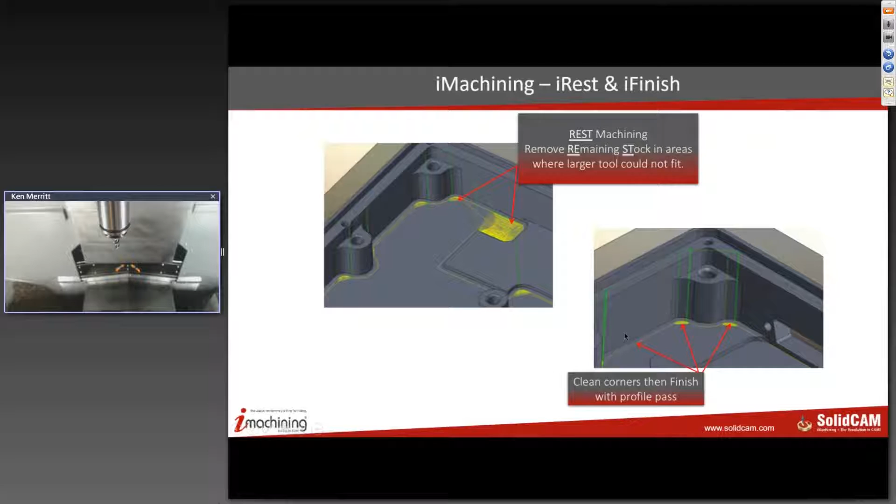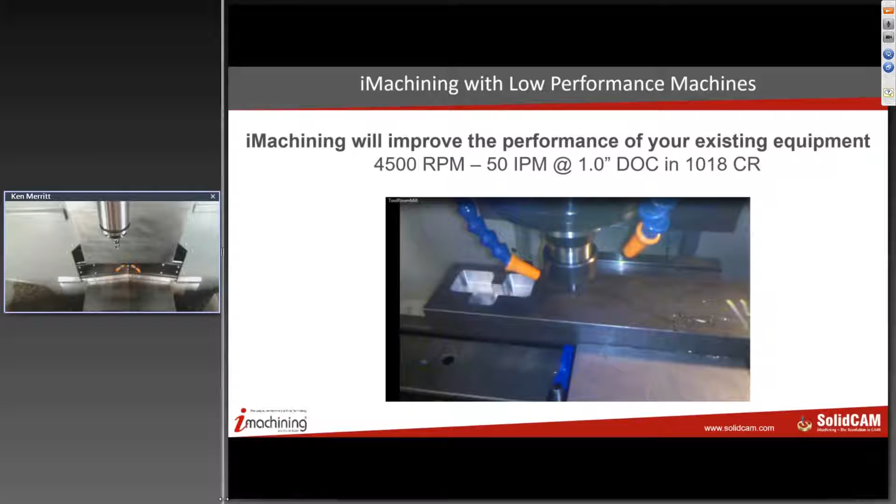Now, before we get into this, let's go back into the machine here for a moment. Notice we're done with our cut. I do want you to see some of this, so let me wheel it back down here.

Brendan, it sounded like you were starting to say something. Well, yeah, I was just going to talk about the machine here, but why don't we take a look at the surface finish on this before we get into that? Maybe a good time to look at some chips, too, there, Ken.

Absolutely. As you can see here, guys, the surface finish on here is absolutely beautiful in cutting this. I can't hardly feel any kind of scraping on this with my thumbnail. So I'm figuring this is probably in the 16 to 18 RA finish area, and that's with no semi-finishing operation.

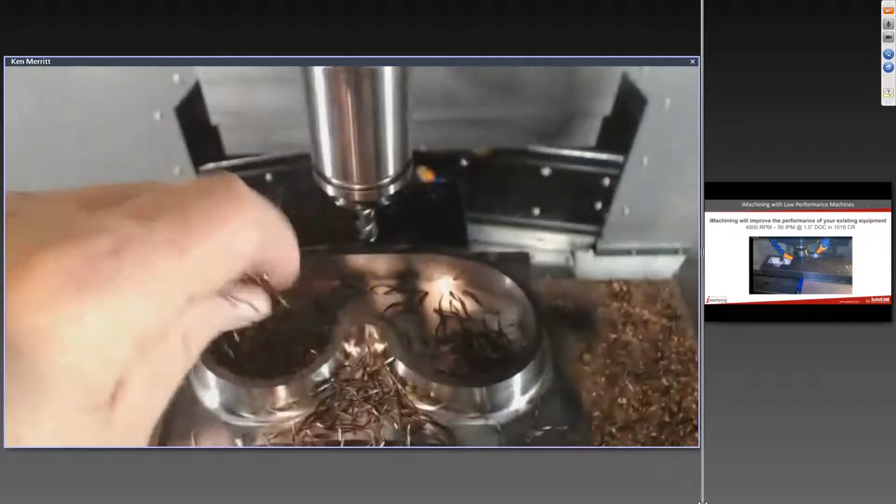Now, I also want you to see, I'll just scatter some of these chips across here. And by the way, Ken had his thumbnail calibrated just a few weeks ago. So I always have it calibrated, man. I have a special tool for that calibration.

But what I want you to notice about those chips there is the consistency in them, okay? Remember I said even though we're working from a minimum angle to a maximum angle, we're modulating the feed rate as we do that so that the chip thickness remains constant at the cutting angle, whether it's at the minimum or at the maximum. What that does for you is it keeps an extremely constant load on your tool, because we're removing the same chip all the time, okay?

So a very, very effective way of cutting and doing what we want to do here. But very nice surface finish all over this.

Yeah, and that's a great point, Ken. And again, that translates over into, you can see here, we've got a picture on the right-hand side of a machine that is, let's just say, far less performance than the machine you just witnessed live. That's being kind and courteous, my friend.

It's really kind of interesting, I talk to many of my customers who are using machinery that's quite frankly probably older than I am, and older than Ken even, if you can believe that. Did they have machines back then? I don't think so, I thought it was the hammer and chisel method back then.

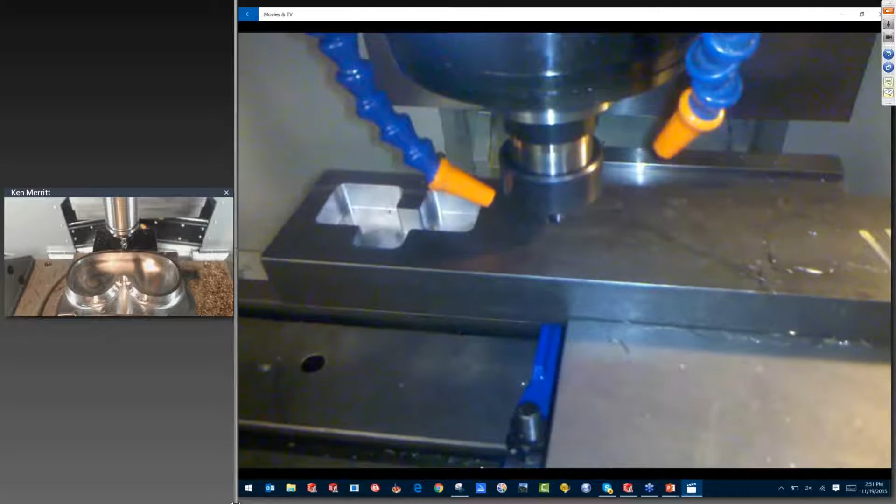But the question that we get quite often is, do I have to go out and buy a $200,000, $300,000, $400,000 machine in order to have iMachining work for me? And the answer to that question is a resounding no. And this video is a great story, and I'll let Ken tell it. This really shows the tremendous capabilities of iMachining and what it can do for your existing machinery, even older machinery.

Guys, this is not a real sexy video, as you can see, but let me give you the story background on this. This is one of our customers out in Colorado. They called me up and said, hey look, I need to do something better.

This is an old TM1, or might have been a TM2, Haas tool room mill, open bed mill. This thing's been rode hard and put away wet many a time. It's rickety, the spindle's not very sturdy, it only has a 4,500 RPM spindle. It can only go about 50 inches a minute before it gets into hesitation going around here. I'm using all 50 inches a minute of it, but it gets into hesitation when it's doing that.

Now this pocket over here, he was cutting his traditional way and showing me what he was doing. He had to cut this with a 3/8 inch tool, and he even went so far as to buy some pretty decent tools. He was using an OSG Exocarb 3150, in a 3/8 version, 3-fluter. That's a $68 tool or thereabouts, pretty decent tool. But he could only do this at 2,200 RPM, 18 inches a minute, and 50 thousandths depth of cut.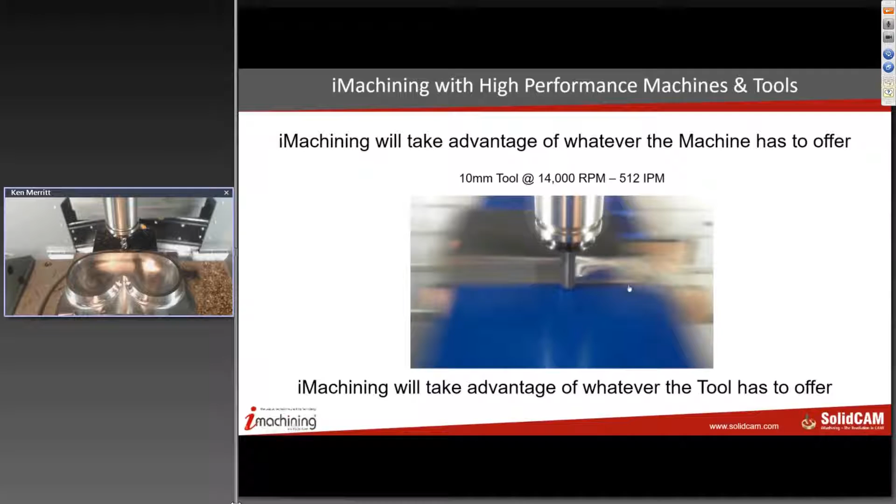Now, if you want to get crazy, and I've been accused of being a little crazy from time to time... Let's get crazy, Ken. Let me show you this one. All the time. And let me tell you, I was laughing the entire time I was cutting this. This is a tool that we've designed.

It's got a parabolic ejection cavity, and I had already pushed this on the machine at 350 inches a minute at 12,000 RPM and 60 degrees of cutting angle, and it wasn't even breathing hard.

So I decided, well, let's take it up a little bit and see what we can do. Running 14,000 RPM, this is a 10 millimeter tool, 14,000 RPM and 512 inches a minute at 55 degrees cutting angle. That's over 1,472 surface feet on this tool.

This is a 3x5 block of steel. We're going to take this down to next to nothing in a very, very short amount of time. And this, by the way, is the second cut on this tool.

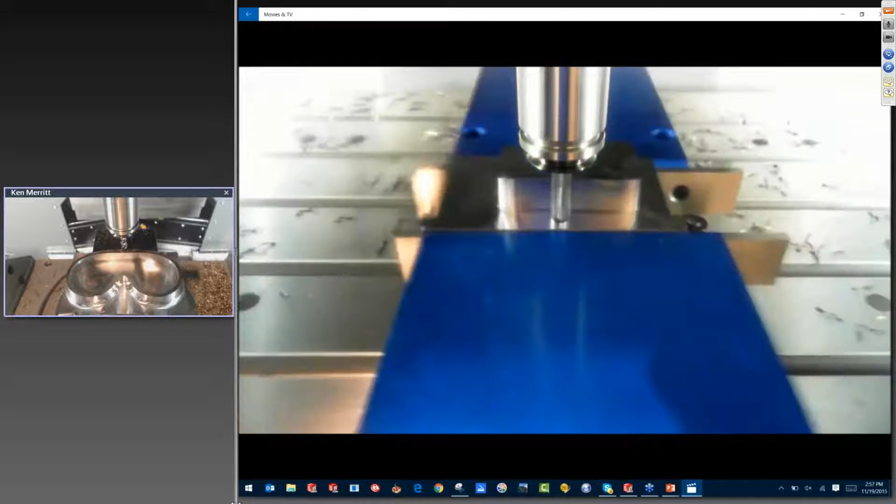I was kind of laughing the whole time because I fully expected this tool to break. I was pushing it to its maximum limit, trying to find out where that limit was, and it already cut one. I was like, all right, let's cut another one, see if we can do another one. So here it is on the second one, and it's still just tearing it up.

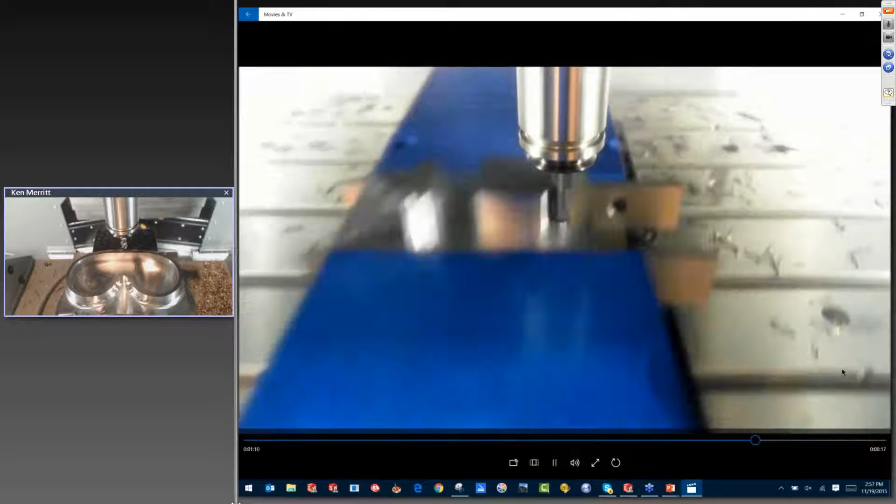Now, obviously this is not something I'd do in production, but wanting to find out what it could do, I decided to push it to its maximum limit. But look at what we've done here on this machine with iMachining's toolpath. We did all of that cutting on a 3x5 at 800 thousandths depth of cut in 1 minute and 27 seconds. It's pretty phenomenal.

Let me just make the point: this is what senior application engineers at SolidCAM do in their spare time. That's why I said pretty pictures on a screen don't mean much in the SolidCAM world. We're all about machine performance.

Again, the people that you'll talk to at SolidCAM, they know machining. They're not keyboardists, not just experts in manipulating the software. We have experts that know exactly how to cut. Ken's pretty modest, but he actually is part of the patents — he invented this tool. So that's the type of people we have, and that's where our focus is.

One thing I want to mention - if you're using iMachining with level 5, level 6 on the Wizard and gaining major improvements but not really pushing your machine to the limit, you can get away with ER32 holders, milling chucks, things of that nature. But if you decide to get radical, with new high-speed machinery, and really want to push the limit, be aware: don't try that with simple holders, because there's a lot of downforce on these tools, especially when digging in with heavy chip thickness.

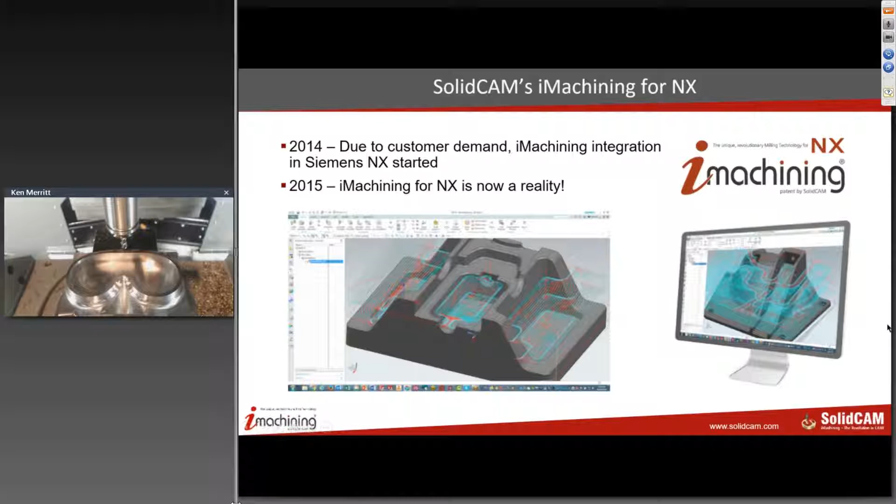So there's a lot going on. There's a question they asked about PTC Creo, and boy, I'd love to see that in the future.

And we're kind of busy bears right now—but did I just say busy bears? Gosh, you did actually. It was a long day. Okay, yeah, I deserve to be slapped for that one.

Anyway, we're very busy people, but I would expect things like PTC Creo in the future, if at all possible, because again, people are just absolutely clamoring for iMachining.

Hey, I just wanted to give a quick shout out to our partners. We do a lot with partners, guys. You heard me talk about GW Schultz, REGO-FIX. We work with Guhring, we work with Hurco, we're working with the Hermle people, we're doing some stuff with Sharp. Internationally, we've got several partners we're working with. One of them here, Applied Machine Solutions, they're gracious enough to let us use their machines for these type of presentations, so I want to give them a quick shout out to thank you.

We do remain machine neutral, so about the most I'm willing to say right now is my opinion of Hurco has changed dramatically over the years. If you're looking for a new machine, I'd say this is one you ought to look at. I'll go that far with it.

But if you need anything in the industry, Skip's got some great resources. He's been in this industry for 30 years, he's got contacts all over the place. So you might want to capture this information. If you need coolant, tool holders, work holders, tools, anything like that, it might not be a bad resource for you to take a quick phone call with him.

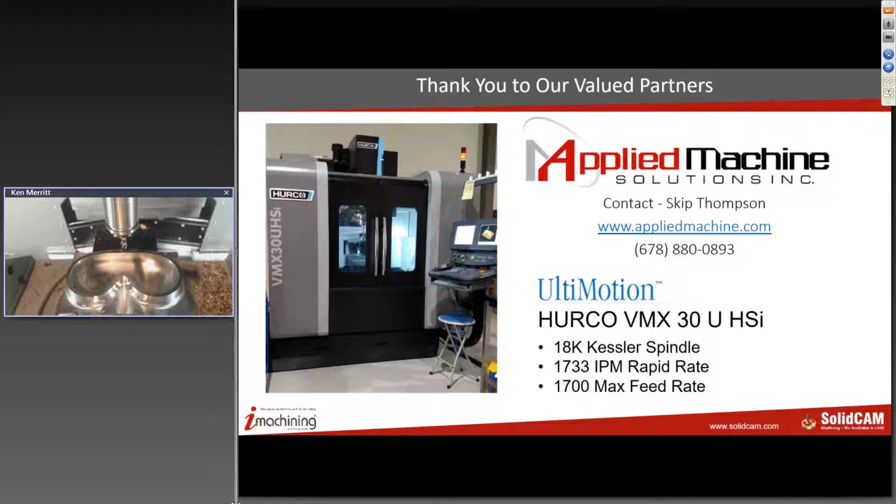And there was a question about machines earlier. We have a staff of post writers—I think there's 7 people on that in the U.S.—that's what they do for a living. Because one of the biggest complaints we hear, why do people come to SolidCAM? A lot of times it's because they can't get a decent post for their machine. They've been promised a library post, or an off-the-shelf, or a certified post. Well, I can tell you right now, 2 machines that leave the dock and go to 2 different resellers from the same manufacturer can be configured entirely differently. That's one of the big differences, is that we make sure that post is specifically working for that machine. So that's a big difference. No matter what machine you have, that's something we can definitely help with. Yeah, we'll work with you to dial it in to your satisfaction.

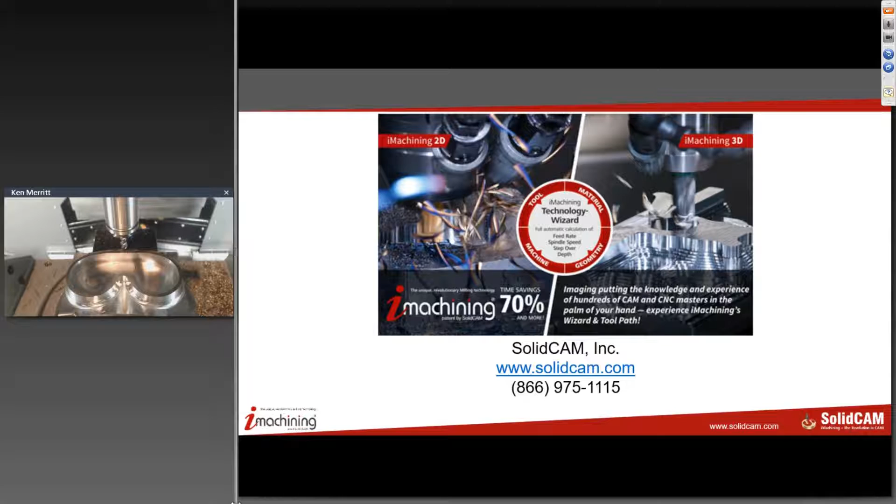Well, Ken, I think we're just about done, aren't we? I think so, we're a little bit over time. The only thing left is the question and answer. We're about 7 minutes over time, so I think we're okay sticking around. There's something else, maybe a little something we may have forgotten. Oh yeah, yeah, everybody on there going, get to it. They're 7 minutes over, come on. You want to give away the money, don't you?

Okay, well, I don't, but I think we need to. Okay, well, what we're going to do, Derek, are you back with us?

I think you're going to really enjoy that. If we've got time for questions and answers at this point, Derek, how are we running? Can we afford to hang on for a few more minutes? Yeah, we're a little bit over, but I don't think that's a problem. Okay, we've got a few here.

One question is, can the user easily fine-tune the G code within SolidCAM? If you have some understanding of structured logic and want to get into writing the post-processor, yes, our post-processors are wide open. We don't lock them down. We can teach you how to run the post if you want, and if you'd like to manage your own, that's absolutely available to you. But are they talking about editing the G code like what they do at the machine, Derek? That's what I'm assuming, yes. Modifying instead of having to alter it afterwards. Is there a way to make it flavored to their way of doing it without having... a lot of the competitive softwares will force you to come back and pay them to edit your posts. So no, our posts are wide open.

The whole idea behind SolidCAM is we don't want to see people at the machine editing code, because if they're editing code, that means the post isn't dialed in correctly or something's not working correctly. We want this thing to be as seamless to your machine as possible.

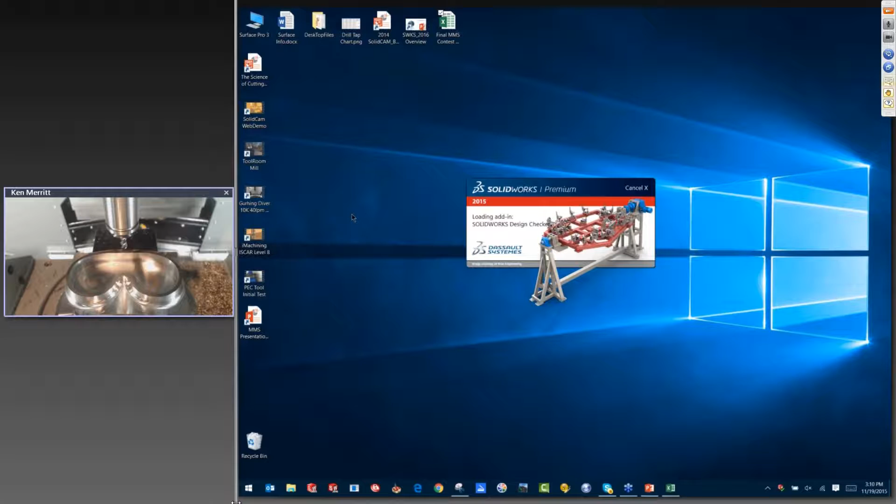Speaking about posts, this person would like to know if you provide posts for small CNC routers. Yes, absolutely. We've got a library of literally hundreds and hundreds of posts. One of those will probably be very near what they want, and we can make edits to make it closer. Exactly, we always edit them.

Another question: what makes you different than what some are calling peel milling? Very good question, there are several differences. A lot of systems out there nowadays claim they do the same thing as iMachining because they do narrow radial engagement and high feed rates and stuff like that. However, we have patented several of our characteristics so nobody else can do those: the minimum to maximum cutting angle, the morphing spiral, the detour repositioning moves, and the ACP - axial contact points - characteristics of our system. Those are all patented features, and nobody else can do that. So everybody else is basically doing either a single cutting angle engagement or a standard constant radial engagement of the cut, and the toolpath patterns may look somewhat similar, but they're not the same. They don't have the channel separations.

They don't have the feed rate modulation for the cutting angle. Most everyone I've seen manages the feed rate based on chip load, where we're managing it based on chip thickness, which is the wizard. Yeah, and don't forget the wizard.

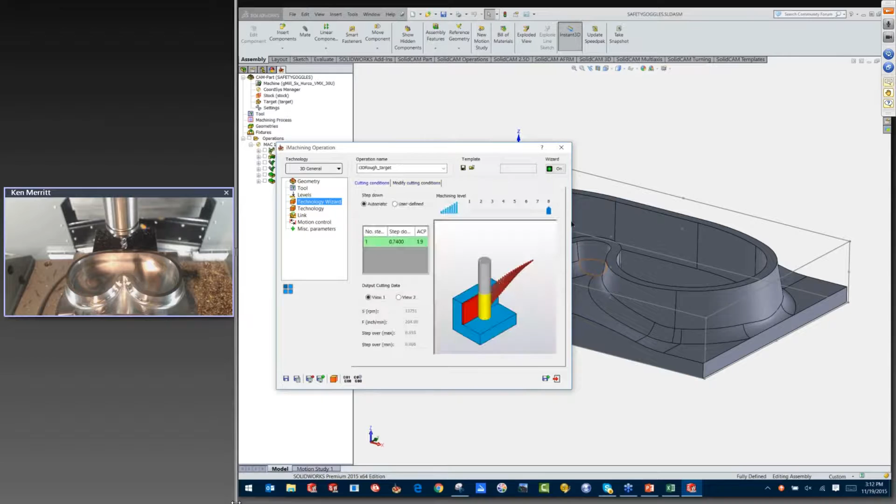Absolutely, it's a huge difference. All of that is part of the wizard, which makes it very easy to set the system up to do what you want. Let me show you real quick: in the operation we were running today, this technology wizard gives us the ability, because we know all these parameters in the background, to easily decide to run very mellow or very aggressive. Because we've captured machine data, material data, and tooling characteristics, we can marry those parameters together in a way that's much easier to set up - that's why we patented the wizard. I hope that answers the question.

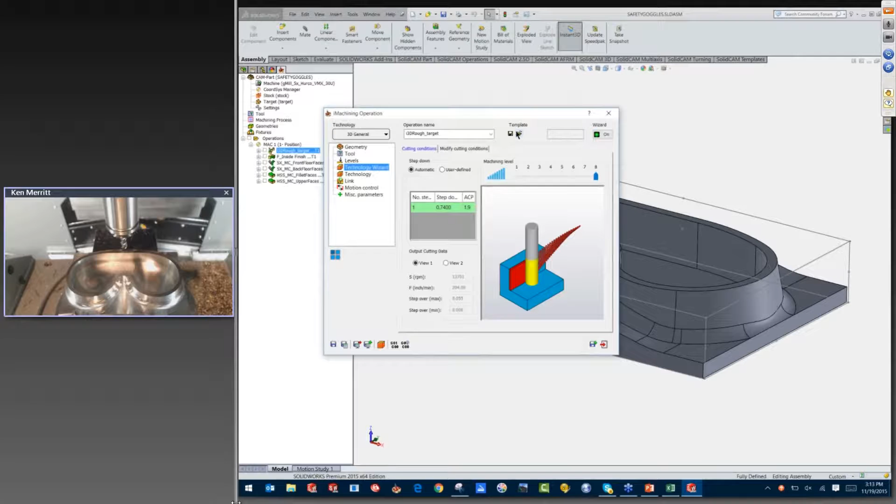So, another question: in terms of the types of end mills that are probably most appropriate for this type of toolpath, what can you talk about in terms of that?

In general, virtually any end mill is acceptable for this. Comparing a traditional toolpath versus an iMachining toolpath, iMachining will make that tool perform significantly better than in a traditional toolpath situation. However, you'll gain more performance going to higher grade tooling - anything with micrograin carbides, sophisticated coatings like AlTiN, Nacro, or TiAlN. Higher helix angles tend to give better shearing force, allowing us to carry more chip thickness, which carries more heat away. So for those kinds of things, I'd suggest high-grade carbide with higher helix angles.

The tool we were using today was not as high a helix angle as the one I ran really fast. However, it was variably indexed with a variable helix angle, which made it run really quiet. So virtually anyone's tool will perform much better in iMachining, but higher performance tools are definitely going to perform higher.